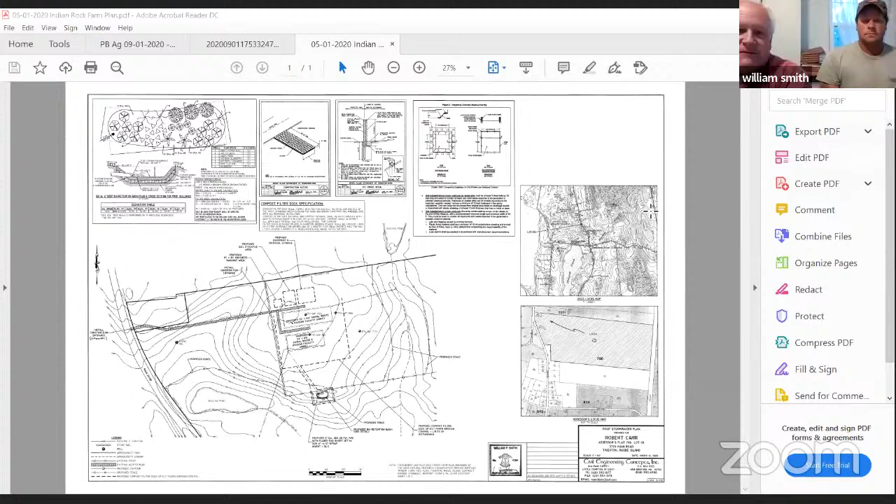I appreciate you making the best of this situation we're all in. This environmental review statement was before the planning board earlier in the year, where there were some deficiencies. Mr. Carr came to us, and we went ahead and tried to pull together some of the missing pieces.

It's 720 Main Road in South Tiverton. We're trying to install two barns. We've extensively dealt with the NRCS in terms of proper animal management. He's got cows on there, hopes to be able to milk the cows once he's got appropriate facilities. What we're asking for tonight is permission to install two barns on the property.

Did we lose him? His audio froze, or his visual froze. Is he still there? Can you hear me? Yeah, I can hear you. Your feed is unstable. There we go. Your audio is kind of in and out, but we'll bear with it. Is that any better? Yes, so far. All right, sorry about that.

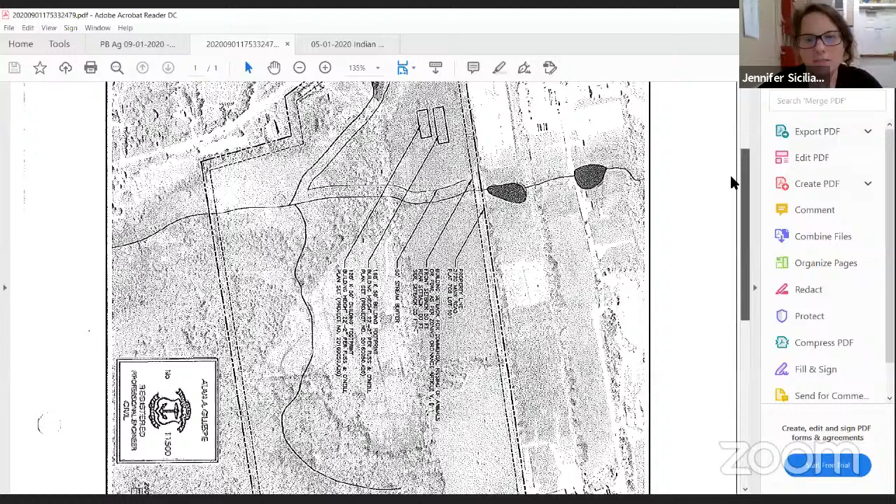So there are several pastures throughout the site. And what's being done now is that there will be fencing around those areas to contain the cattle so that they do not get into the streams or the wetlands. Again, that's something that the NRCS is mandating that Mr. Carr do on the farm.

So it's hard to tell on that picture, but there are several pastures throughout the property, and the pastures are all alternatingly grazed. I'm not sure if that's the appropriate term, but the cattle are moved around as appropriate, and they will be fenced so that they can't stray into the stream or into the pond.

Okay, if we look at the old one, that's what I was looking for. On the plan you show, you have the sheltered areas clearly fenced in, and on the east side of the stream that's fenced, and to the north of the pond, but it doesn't show any other fencing to protect the rest. Yeah, east and west of the stream will be fenced in — we didn't show the whole farm. We were really looking at this more in terms of the construction of the barns themselves.

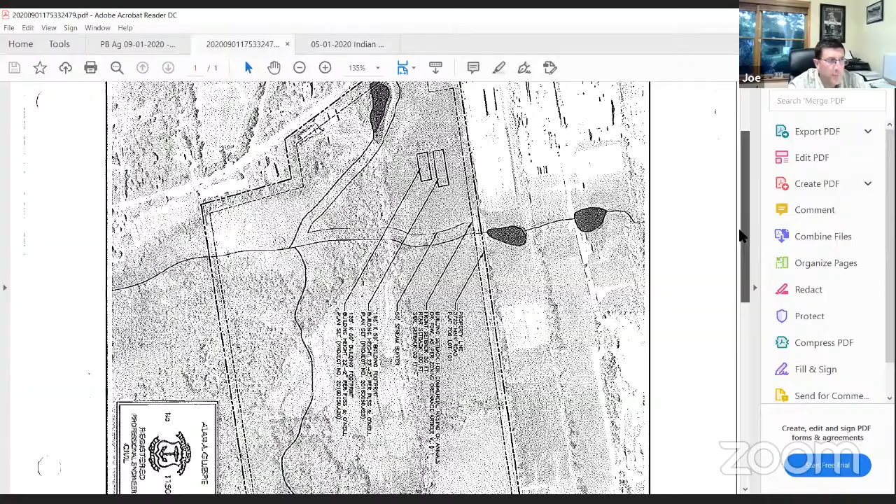Okay. Susan, it's Joe — yeah, oh yes. Quick question, Bill — did NRCS provide a minimum distance that the fence should be from the pond? If so, they should probably just show that.

Yeah, it was 30 feet, but we've made it 50. So if you could just add to the plan a 50-foot minimum — I mean, 30 is required and you're proposing a 50-foot minimum. Sure, we can show that.

Okay, and I just had a question about the three other dotted line structures — are those all temporary during construction? Yes. Part of the soil erosion and sedimentation control plan requires that we have a concrete washout area, a soil stockpile area, and those designated areas so that the contractor, which will actually be much of the work done by Mr. Carr, stays in designated areas.

Okay. So Joe, do you feel comfortable — or not comfortable, but is it acceptable — with their stormwater plan? I guess the biggest thing is whether it all calculates or engineers out adequately from the structures. Yeah, that's all pretty much cookbook, right out of the manual. Okay, all right, excellent.

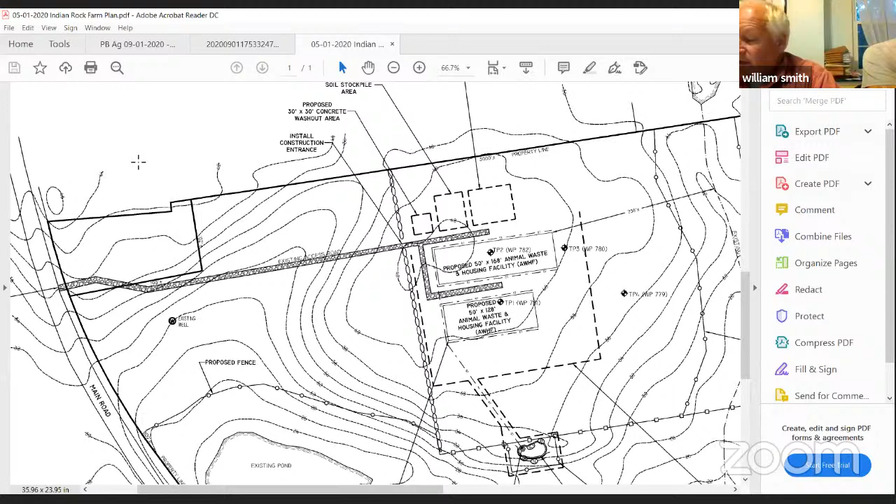Okay, I have a couple last questions. Joe, do you need any kind of stormwater management plan for this, or was one submitted for review, or is everything adequate without one? You're talking about operations and maintenance. Yeah. Again, as Bill said originally, it's fairly simplistic. It's gone through NRCS as well as agricultural, and I think the increased impervious area has been addressed by the rain garden. So I don't know that you need anything else.

And then the last question I had was, who does the SWPPP reports on this? Who's going to be designated to do those? I'm mostly concerned because it's so close to the watershed and wetlands, so I didn't know if Bill, you were planning to do those. I was planning on doing that. Construction period should be relatively short, so if the board doesn't mind, I could take that on myself and copy the board each week when we do the inspections. If you're going to do them, please submit them to Jennifer so we have them for the file, so we know they're getting done.

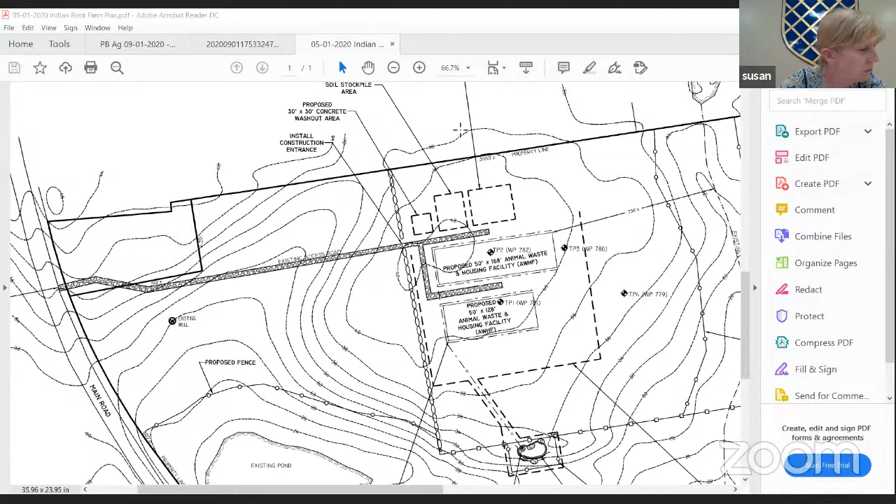Again, we appreciate all the information you provided us, and what we will do is take a vote to send a positive letter of recommendation to the building official so you can move forward with this project. So do I have a motion to endorse this environmental review statement? I'll make that motion. And do I have a second? Second.

Any comments or questions? Okay, so we have to do a voice vote, roll call vote. So we'll go through that. We've got a first and a second to endorse this project.

Okay, so we have Rosemary, yes. Susan, yes. Dave, yes. Peter, yes. And Christine, yes. Excellent. Okay, you have five yeses. Thank you very much, and no nos.

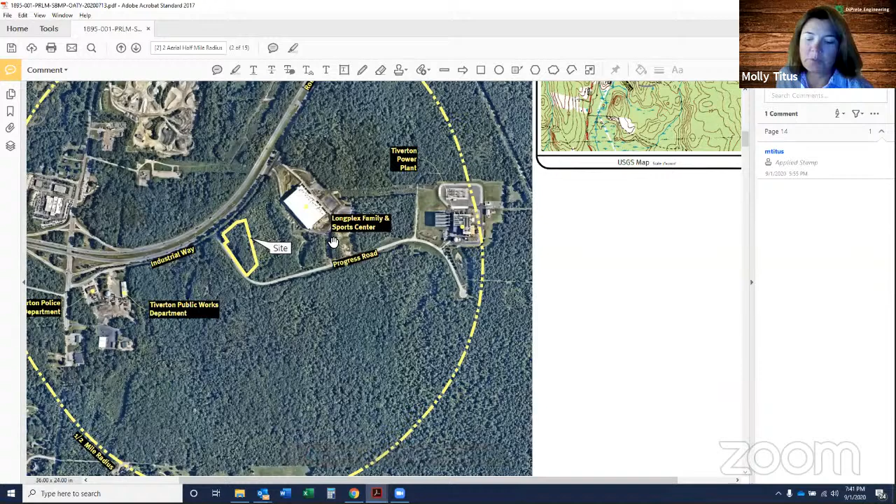Again, as Dave mentioned, we're at Assessor's Plat 107, Lot 801. It's on the southwest corner of Industrial Way and Progress Road, located within the Tiverton Industrial Park. The existing site, as shown here as an aerial view, is wooded, as is the majority of the existing industrial park. The property is owned by Southern Rhode Island Properties and is proposed for development by Advantage Self-Storage.

So here's the proposed site plan. This layout is exactly the same as it was at the time of master plan. The building footprint, access drives, parking, and approximate locations of underground infiltration and detention for stormwater have remained the same.

This building meets the dimensional requirements for front and rear yard setbacks. It meets building height. It was noted during the staff report that we inaccurately reported building lot coverage instead of lot coverage. So this 19.5% is building lot coverage, and total lot coverage, including all impervious, is 41.8%, which is still far below the allowable 70% lot coverage.

We are proposing 9 parking spaces. Based on a warehouse storage use, there's 1 space required. We are providing 9 for up to a maximum of 3 employees and users of the building to have parking for these front storage units.

We've got 3 full access driveways. All of these driveways are 2-way access. We've got a fenced perimeter for the rear of the building. You can see these 2 gates, one located at the rear and one at the side of the building. These access points will be accessible for emergency vehicles and all users of the building.

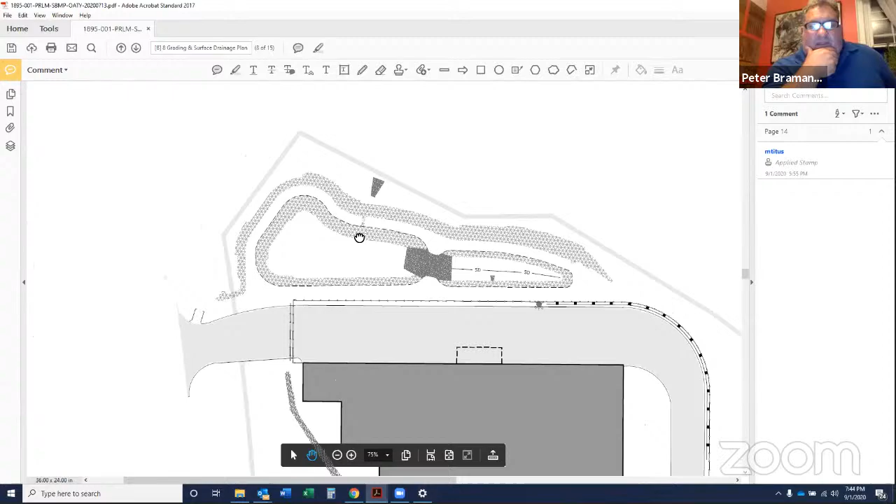Molly, could I just request, I think you're at about 50% magnification. Could you bring it up a little bit? I can try. Let me see if I have a mic option here. Well, I'm not talking about the volume. I'm talking about the image. If you bring your cursor down, see if it, yeah. If you could bring, that's better. Thank you so much. You got it.

So infiltration, water quality, and then detention in the rear of the site. The next image we have is the actual drainage pipes creating all these systems.

Additionally on this plan are the utilities. So this site is serviced by an existing water main on Progress Road. You've got a domestic service and a fire service proposed. These have been reviewed by the water department and are acceptable. Fire flow tests were done, not by us, but by the department, confirming adequate pressure for these connections.

There is a proposed sewer service. The industrial park sewer was designed at the time that the industrial park was designed decades back and never constructed in Progress Road. This project is going to construct the first 2 manholes for the town along in the right of way and then leave an additional stub for future connections. As noted in the comments, this sewer line will need additional permits from Tiverton Wastewater.

In talks with Tiverton Wastewater, which I know you have a letter from Sarah Stearns, their director and engineer, she's not prepared to review the design of this line and connection until the project has passed preliminary plan and building review, because she doesn't want to review it more than once. Not that she won't review it, but she wants to make sure the project is unchanging before they go through and detail the engineering review of a sewer line.

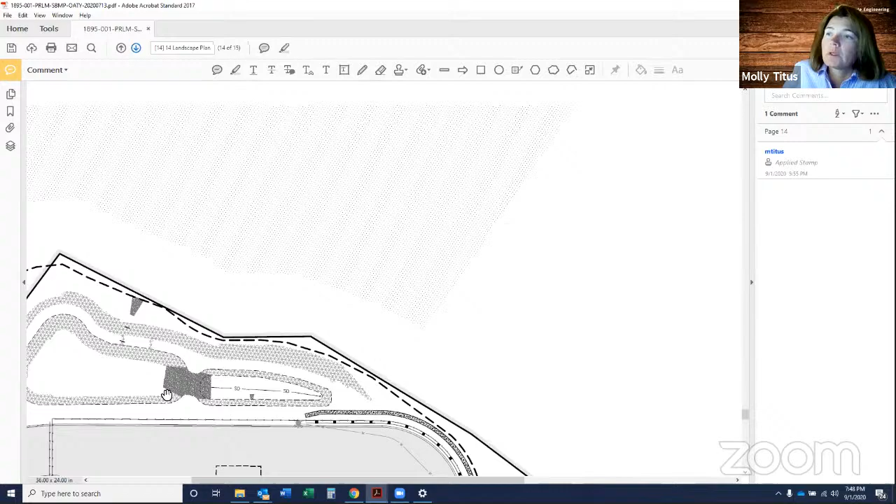So the landscaping plan, I know there's comments, and this is the area up for discussion tonight, but I'll speak about the rest, which is we've provided the 15-foot landscape buffer along the front. We've proposed hollies and birch and maple, screening the front of the building. We have full buffering around propane tanks, transformers, some plants to the rear, adjacent to the detention pond, and then also along this retaining wall.

This area is the area for proposed selective clearing, as mentioned on the architectural plan, and will be part of the view shed review. It's acknowledged that we've provided some buffering here, but perhaps some additional plantings would be required in this area where we're not clearing native and existing vegetation to provide that 15-foot buffer.

In summary of the site, that's kind of the overview, the details, what we have for permits and approvals at this time. I don't know if we want to do engineering questions now, or if you want to go on to the building with Mr. McPhee.

Susan, that's kind of... I know. I think it would help. I'll ask the board what their general sense is. I think it would be easier if we focus on some of this stuff first before we go into all the design elements. That would be easier for me. How do the rest of the board members feel, unless you want to hear the rest of the presentation first before we go back to the beginning and start going through this in sections. Anybody have a preference?

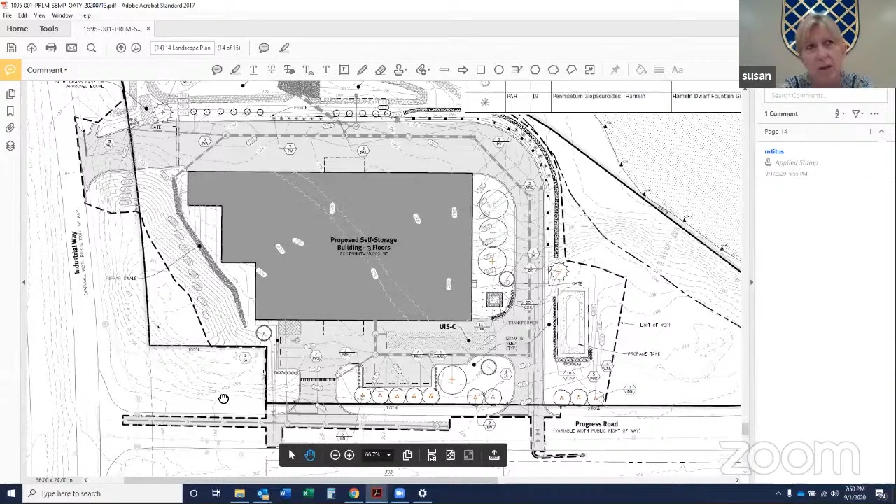Going once, going twice? I like divvying them up, talk design later and look at the land use plan now. That's great. Okay. All right. Anybody else want to voice an opinion? Okay. All right. Why don't we start and go through the sections of what you guys have presented now.

I'm trying to figure out how we can not go back over things again. So I want to start with, I guess, Joe. If you can cover your comments in relation to the grading, the drainage, the stormwater, things that are on the plans first, and all your comments, so we can get through all that part.

Thank you. Molly, I think you did a good job with the presentation. We'll start there. I just had a couple of notes that I wrote down. I think you said you have permits. You have a PAP permit from RIDOT for the state road? No, we don't have a state road. We have local DPW. Oh, Industrial Way is not state?

No. No. Okay. Let's do all the utilities as a separate section, Joe. All right. Okay. All right. We'll do all that later.

Going to the drainage, you noted the roof drain goes into the subsurface storage in the front of the building. For clarification for the board, that's actually a very good place and use for it. Roof runoff does not require pre-treatment, whereas runoff from the road does. Molly's told us that everything from the road and parking lot goes into the sand filter, which is pre-treatment, offering pre-treatment and infiltration. So I think that was done well.

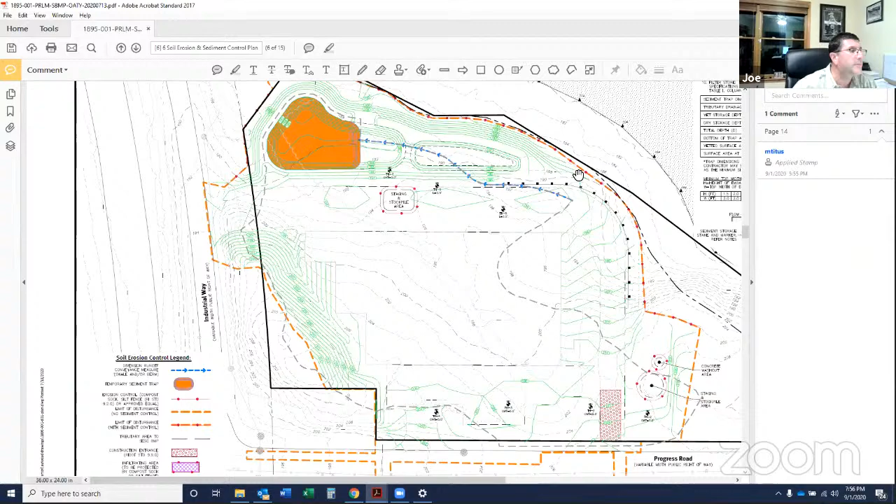Provide call out on detail plans for what appears to be a wall constructed along the driveway in the northeast corner of the project. So where's that wall? It's here. Okay, how tall is that wall?

Is that wall going to require structural calculations? That wall will be Versalock, which will end up getting a structural stamp at construction.

That's fine, just when they do the Versalock, coordination - just remember you do show guardrail. And the straps, if they go far enough back, you're driving guardrail through the straps. It can be done. The minimum distance is 5 feet from face of wall to face of guardrail, and we have 7 feet to allow room to install that. Okay.

Like I said, I know you can actually install the posts through the fabric. It just needs to be noted, so when they're building it.

Provide an elevation view or a section of the retaining wall for the planning board. Again, just a quick elevation, I'm thinking for the reviewers, what type of wall is it? You said it's a Versalock wall, so can you tell us, or equal, Versalock, Unilock, or...

Yeah, well, it's like saying Xerox machine. Can you explain for us non-engineers what that means? A Versalock - it's a modular block wall.

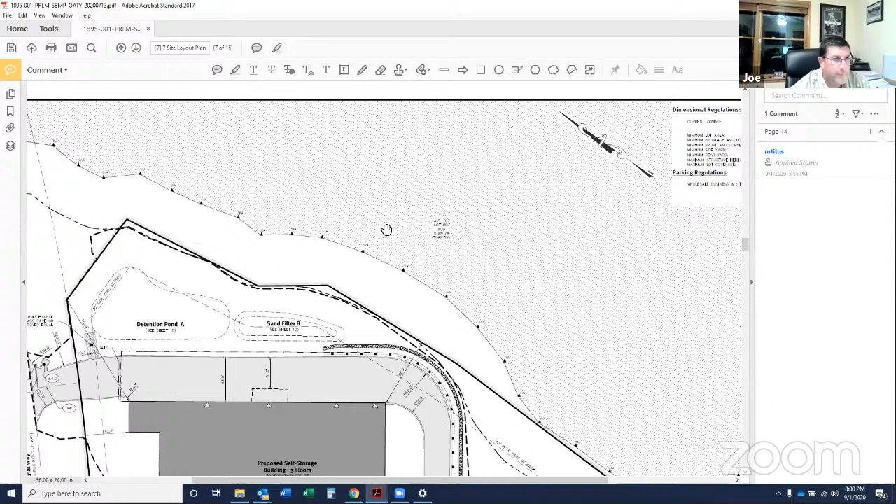The last couple of items - please provide call out for driveway and parking area material on the plan, not just in detail. I imagine it's a paved parking lot. Yes. It's not pervious pavement. No. Thank you.

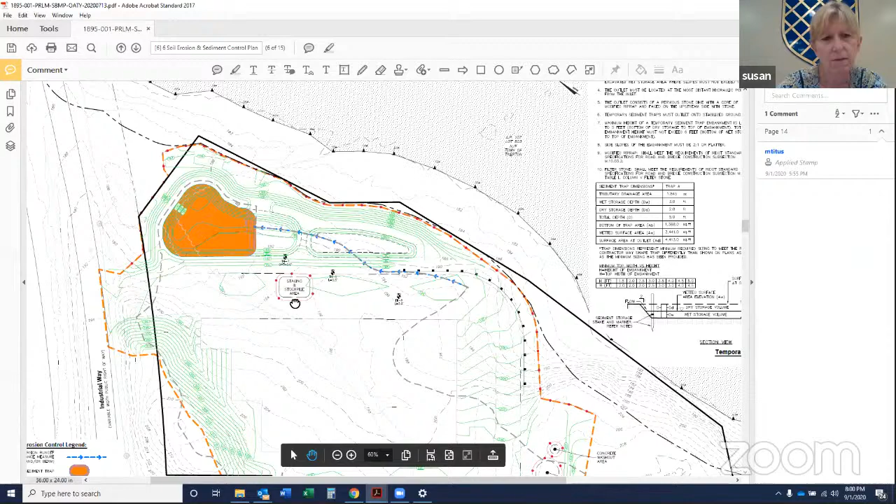Green lines on one of the sheets. Oh, that's the soil erosion plan. Same contours, they're just shown lighter. Yeah, but the front shows a lot of elevation, and the back shows a lot of elevation change, so I can't get very 3D on it.

You can explain a little better for us what it is now and what it's going to be after, the before and after. Molly, you want to field that? Sure. So right now the high point is right here at the corner of Industrial and Progress.

It basically entirely slopes towards the wetland edge. So if you picture this, elevation is up at 214, you've got a high along here. There's a high point at the other end of the site. Everything pitches back towards the wetland. So at elevation 214, back at this wetland edge, it's 184, the existing grade. So it slopes to the back.

Right now, this roadway is at 202. We're proposing our finished floor at 205, just a little higher than the road, which is how you like to see buildings so they don't look like they're in a hole. And then the back of the building is an additional story lower. So the building is kind of built into this site.

So you've got a building that looks about level from the road. You've got 206 here, 205.5. So the building will be at eye level, doors at grade coming from the road. And then this ramps down to provide an additional story in the back, to make this constructible without more earthwork than is needed to fit this site.

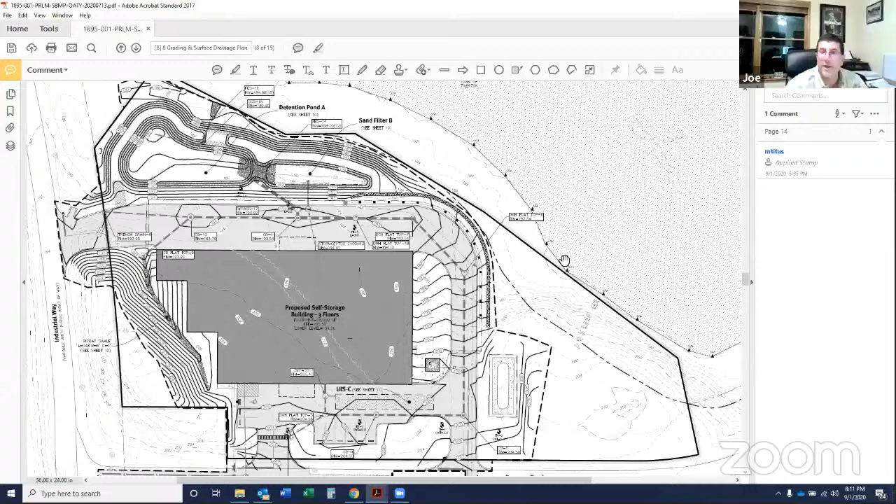Anybody else, any other questions? Okay, Susan, yep, you should have a copy of it. I've got a copy of the stormwater management plan dated 2/19/20. I imagine I have three of those binder things at home. I don't have them with me because I don't tend to read them, honestly, because they're beyond me. So I leave that to you guys, to legal and engineers, to read those and interpret them for us. And if they pass the test with you and you give us your recommendation, then I think that's where we go with it, because I don't have any expertise to evaluate the information in them. So, but I think you did submit three: a soil erosion, probably stormwater, I can't remember, something else. So I think we're good with that.

Okay, so let's move on. I wanted to go through all the utility items that were presented, the municipal utilities and things. I think we could go with that next.

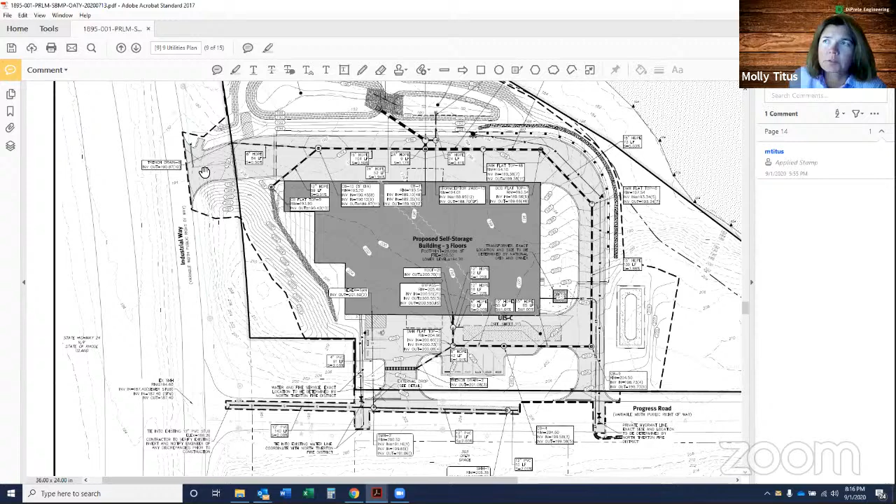We don't have the authority, because that's not part of your property that actually fronts on Industrial Way - it's town property. This is part of the road right of way for Industrial Way. So it's the same here - we have frontage on Progress and Industrial.

Right, so Rick, can you explain - that's why I want Rick to explain to me what it means that that's right of way for Industrial Way. I guess I want to know who owns that property. To my knowledge, DPW maintains it, but the town owns Industrial Way all the way to the circular cul-de-sac, where what I would call the northern entrance to Longplex is located.

So what does that mean, because it's not actual road but it's right of way? Travis, I don't know if you need to explain this - are they crossing onto property that belongs to the town that they need permission from the council for, or is this considered actually part of the road? So their property borders onto road. I mean, it doesn't border onto the road, but it borders onto the right of way.

Susan, I think counsel should weigh in, but right of way or town road are pretty much one and the same. Any town road is within the town's right of way. So it's a public, town-accepted road. Well, wait a minute - it's incipiently dedicated, correct?

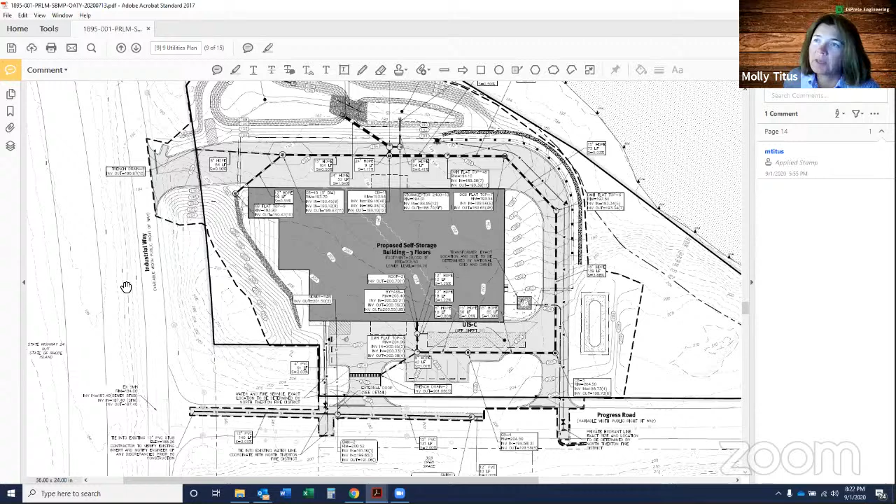That's my question, I guess, because the road isn't there. The road is there—the right of way starts from here and goes over to here. This is considered all actual road. The paved area does not define the road; the two lines Molly just pointed to define the road. Our dark property line starts the road, and then this ends the road. So it's an easement, and I believe when we got this from the state, it was more than 40 feet, if recollection serves me, but again, this was way back in the day.

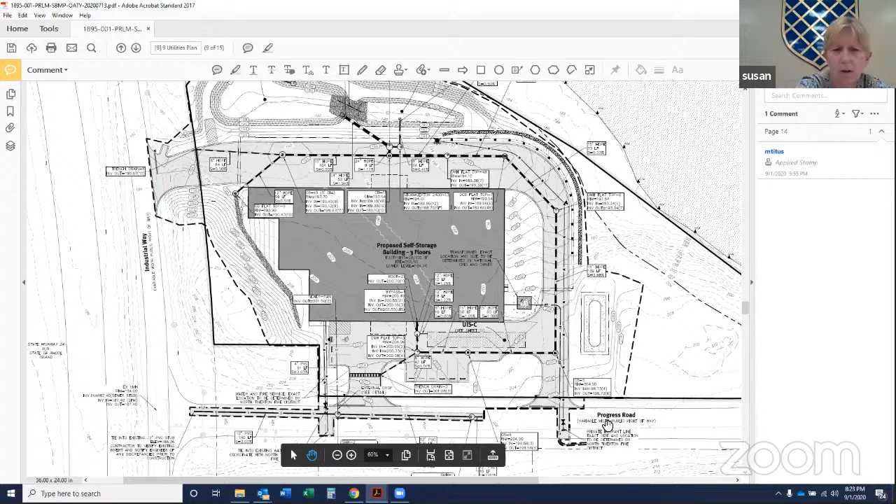So is that considered road, not town property? I mean, it's town property, but it's road. Is that true for the part that swings around onto Progress Road too—is that going to be considered right of way also? This right of way, this is the Progress Road right of way from this line, but then this left corner—I believe the corner at one point in time the town was going to hold onto so they could put some kind of signage, way back. So does that fall into right of way, or is that considered town property as a different lot? That's why the boundary is there, I think—I think it's a parcel, is it not, Molly?

I actually think the right of way flares out if you look at the mapping right now. I know there were parcels—I could think that's how it's labeled on your plans. I just am not clear about it, hold on, let's go to the survey. Yeah, there you go. So no, I agree with Molly, that corner is actually part of the road.

Where it reads Progress Road, the road is 50 feet or so wide. When it gets to the intersection, it is actually much wider, so that way if the town does decide to put up signage or radiuses or whatever they want to do, that's all considered right of way of the road. But right of way and road are usually different—a road is placed within a right of way.

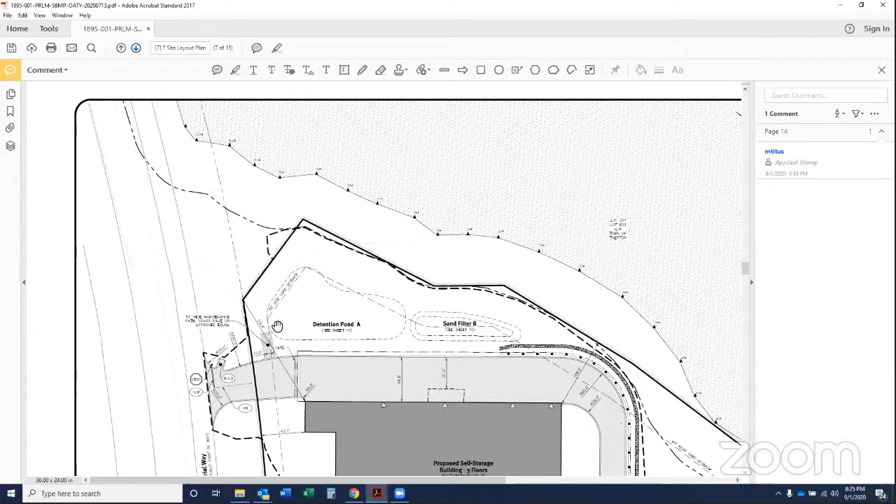Industrial Way is a particularly wider right of way in that case, but anybody who gets a curb cut, they cut across the grass to go from their property line to the actual asphalt pavement or a sidewalk. So this is a common occurrence where DPW gives a curb cut from the actual pavement to their property line, and it might be across sidewalk or grass.

Okay, all right, that helps. Thank you. Does anybody else have any other questions or comments about DPW? Okay, I'm all set for my comments. Thank you, Sue. Okay, thanks, Rick.

All right, I'm going to go on to North Tiverton Fire District, and that is the water that supplies the business park. So they're saying that they do have availability for water, for adequate pressure for 3 people—I guess that was 15, yeah, 15 times 3 gallons, so 3 times 15 gallons a day.

My question with that was, I know it doesn't fall under our purview—I assume this is going to have sprinklers inside for fire suppression. Yes. Okay, so I don't know if the fire department could, or who calculates how much water volume and pressure that takes, in addition to just supplying water for flushing of toilets and a sink.

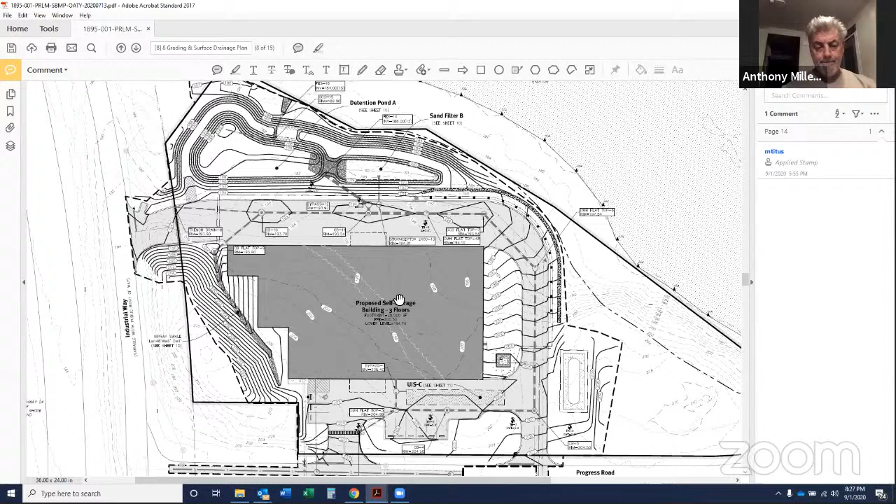Engineer. Yeah, the fire protection engineer. There's a fire protection engineer who does those calculations based on the available pressure in the street. He will size the pipes to provide the coverage required, and part of that calculation is tied all to the building permit.

But if there isn't sufficient pressure in the street, the applicant would have to put in a pumping station within the building or on the property that would provide the pressure required for those sprinklers. But again, that's all tied into the fire department and building inspectors' review of the plans and their permits.

Okay, so just so it's clear, any additional engineering that it took to make it work would fall on the applicant to provide, not the town—is that true? Correct, if they want a building permit. Right, it's up to them to make sure there's adequate volume, water, and pressure for their toilets and their sprinkler system. Okay, all right, does anybody have any other questions about water availability?

Okay, all right, then we have the Tiverton Fire Department letter. It was the placement of the 30,000 gallon propane tank, saying that they have adequate distance from the building.

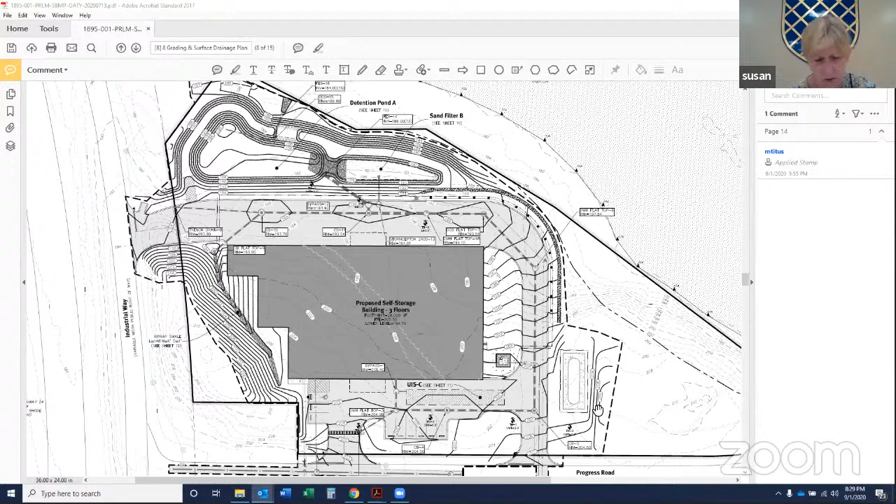I'd asked that you show fencing, but they wanted to see some kind of bollards or security on the plans. Also, I don't know if you have any detail. My question was, is that propane going to be piped into the building? Because I didn't see a line to heat the building. So how does it get there? Am I not seeing the line that shows how it gets from the tank to the building? No, there's not a pipe drawn at this time, but it will run here.

Can you put a pipe in? Yes. All right, usually for the fire department we'd like to see it, and we're required on other plans to show more detail in your notes about the propane tank - the elevation, if it's on a concrete pad, what the fencing around it looks like, if you're going to have any safety bollards, all the things the fire department was specifying, like the detail in the plans and how it gets into the building, extensively in the codes required to permit a tank of that size and nature.

There's a whole list of requirements that we'll have to abide by. So are you saying that would be at the building official's level? That's a separate permit actually that gets applied for typically by the tank provider and installer. It was done well after the fact on the neighboring project.

Okay, so I guess I need to ask somebody, Joe or somebody, if you feel like this is adequate representation for a preliminary plan, or do you want to see any more detail of this? No, I think it meets what's required for site plan.

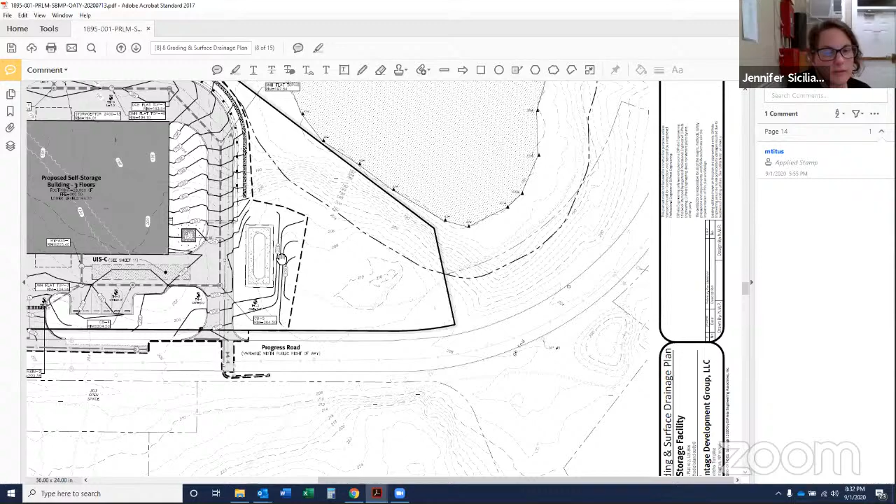But I would like to see the line. You have all the other utilities drawn showing how they get to the building. I'd like to see where that propane line's going to be on the plan - not complicated, just where it runs. I believe the landscape plan has a fence at least. Yeah, there's fencing shown - that's this line. The dotted line is the concrete pad. Right, the oval is the tank. It's a freestanding tank at this point, so the line goes into the building.

Okay, does anybody else have any other questions about it? Okay, then we'll go on to the DEM insignificant alteration permit letter, shown from the RIPDES permit and the wetlands preliminary determination. My question is, it says site plans were submitted with the application for DEM on March 10th, 2020, but the plans you submitted to us are dated July. If you can please submit the copy of the March 10th plans so Steve and Jennifer can review those to make sure they match what we're reviewing. Okay, yep.

Anybody else have any questions or comments? No. Okay. Well, I've asked all my questions on utilities. Does anybody else have any, on this part? Not on this part. Okay.

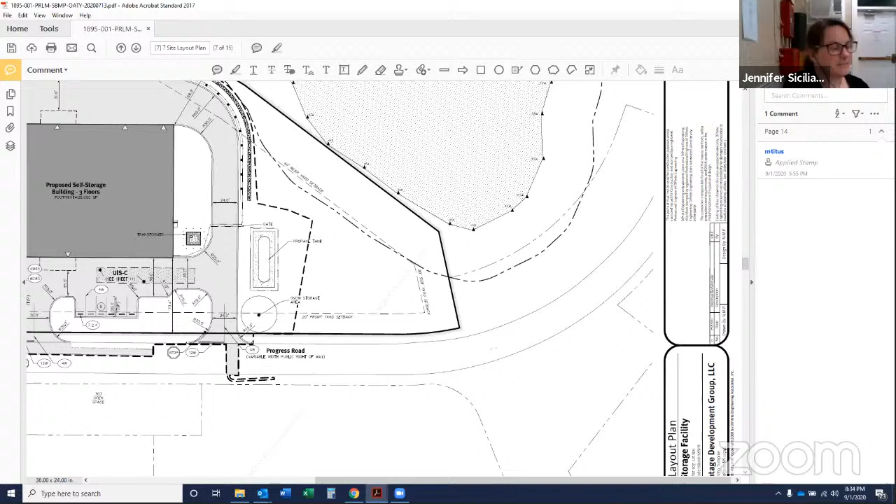I just want to make sure everybody remembers in their packet the minutes from January 21st, 2020 are the conditions that we had for master plan approval. I won't read them to you, but it's page 3 and 4 of 11. So before we review the preliminary plan, we just have to make sure all of these conditions have been met, and they're through most of them now. We just have to finish that up and keep that in mind as we finish the process.

If there's nothing else specific to the land use, then I think we will go ahead and go on with the design architectural review. So whoever wants to come and present that, it's your turn.

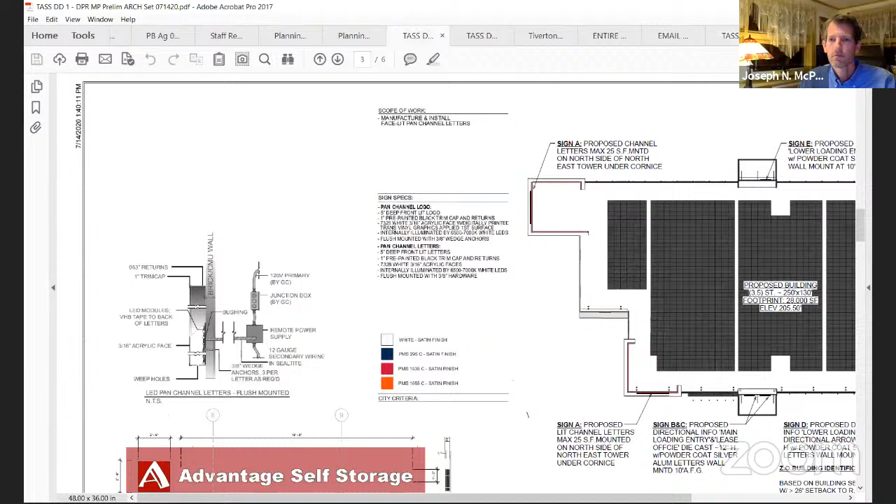I can share my screen now. Sorry, should have done this a little earlier. One second on that. Excuse me, one second. So this is the architectural set that we submitted. Let me turn this off. Okay, sorry about that.

So this is the exterior of the building. On the lower level, on the north side, there are some grayish, taupe colored panels. Those are horizontal, and there are vertical panels too, and the tan is more vertical.

On the northeast corner and on the northwest corner, there are two towers. These towers may occasionally be visible from the highway. They have some display windows on them showing a storage unit display, kind of a display of the storage unit doors. This arrangement of the towers and display windows is part of the prototype being developed for this company. There's another building in Port Jefferson that has very similar towers with these display windows.

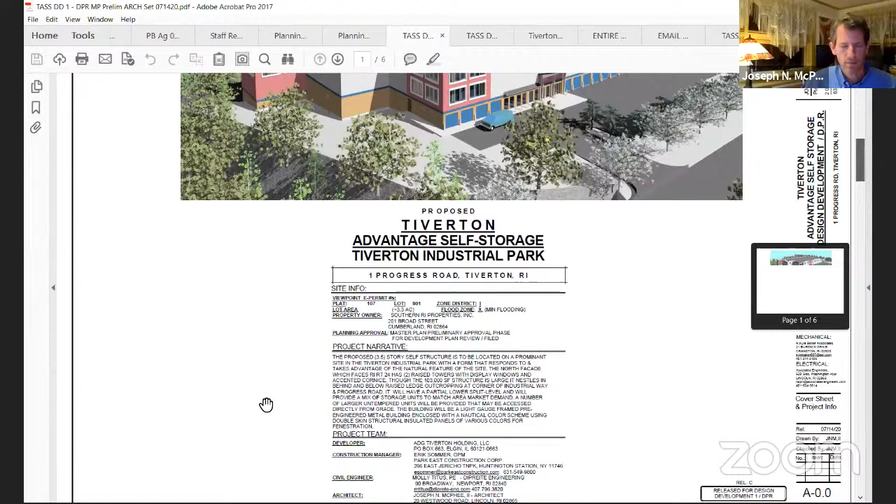There are also, at the lower level, a series of overhead doors that are also untempered, and a second entrance at the lower level that mimics the one on the upper level, very similar.

The overhead doors have a jamb header detail panning that's used, which is a little more durable than the insulated panels. There are bollards protecting the overhead door openings as well. You can see the bollards there.

The double skin insulated panels are one method to improve the efficiency of the building, and the roof is also insulated well, hopefully above code. It's a single pitch shed roof, with a parapet on the south side and parapets on the north side around the towers, and also at the field of the roof.

The water pitches to the west, where it will be collected on interior roof drains, arranged in pairs, with a short parapet on the west side. The water is collected on the interior, and through multiple drops comes down to the galleys under the paving area for the rainwater.

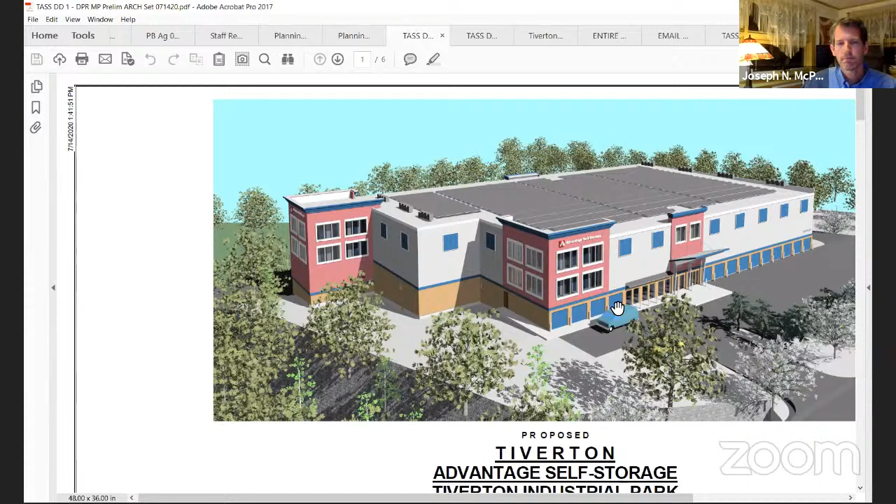The towers are raised a bit from the balance of the roof, but I'll talk a little bit about the concept of the building.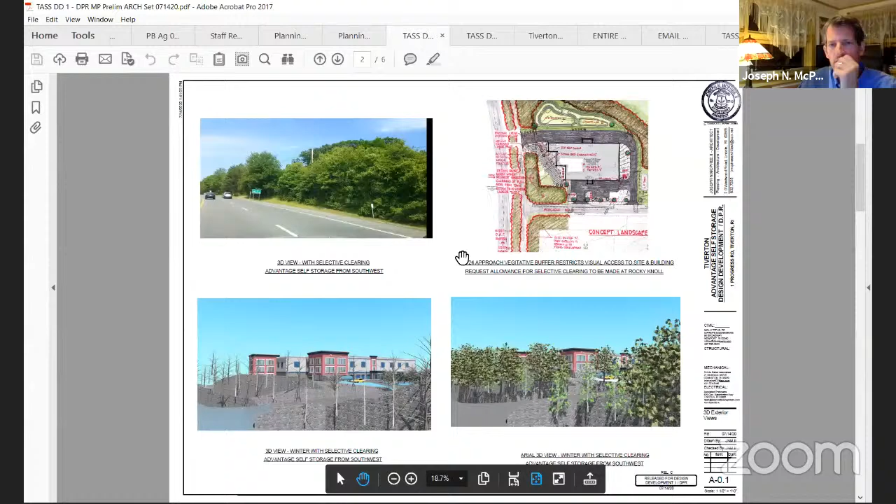With the site, essentially this is the highway. We have buffers between the highway and the industrial road, a vegetative buffer that you can see in this photograph. I'll show other photographs of the tree buffers as well. There's also a secondary buffer with a very wide right of way on Progress Road and Industrial Road that is heavily wooded, with a considerable amount of large boulders on this hill.

Like Molly mentioned, it's probably 18, almost 20 feet between the roadway and the top of the hill, and then the floor slab is dropped another 10 feet from the top of that hill. So this really minimizes the size of the building, with this natural vegetation buffer, but also the ledge, the stony knoll that's a woodland.

We are located on a very prominent site, but it's so heavily wooded there's a chance that no one will ever see the building, or very rarely see it in certain seasons. So there's interest by the owner to potentially do some selective clearing of this right of way, keeping the large trees but removing some of the small dead and dying trees and underbrush to reveal the stone feature there, and allow some visual access to the building. It's still going to be heavily screened by both the state right of way and the existing trees. So that's kind of the concept for that.

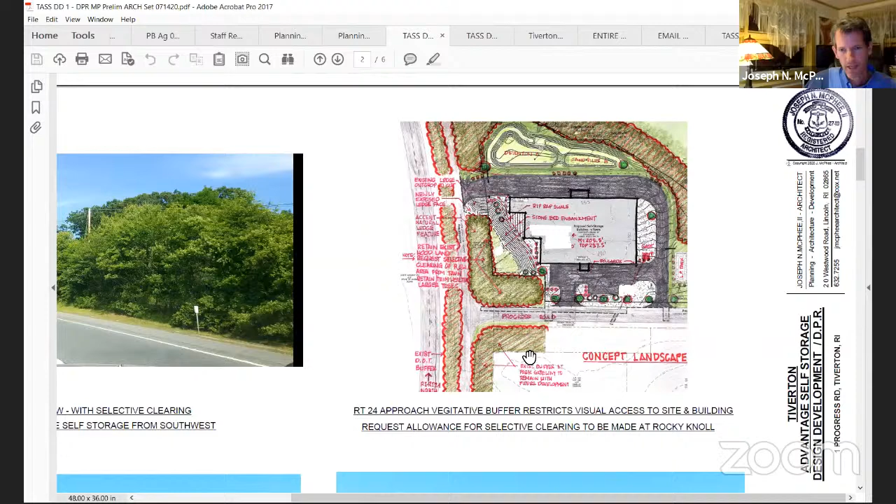I do have some other photographs on the side, I'll show you. These are a couple of renderings that show winter selective clearing; it's going to be a lot more trees than that, probably kind of heavily wooded. I want to share another image here in a second.

So here are some images of the site. This is from Route 24 South. You can see there's a very heavily wooded area on this buffer between the state right of way and Industrial Drive, and beyond. This is another view from 24 looking at the site.

Here's just a couple of other structures in the immediate area of the building. This is the DPW building, the closest building to the site. This is the Longplex structure, which has had extensive clear cutting of the buffer between the highway and the right of way and industrial road, but it's a very large building, set back off the road, probably further than the building we're proposing. This is a much larger building, probably 3 times the size. This is the power plant just up the street from Industrial Road.

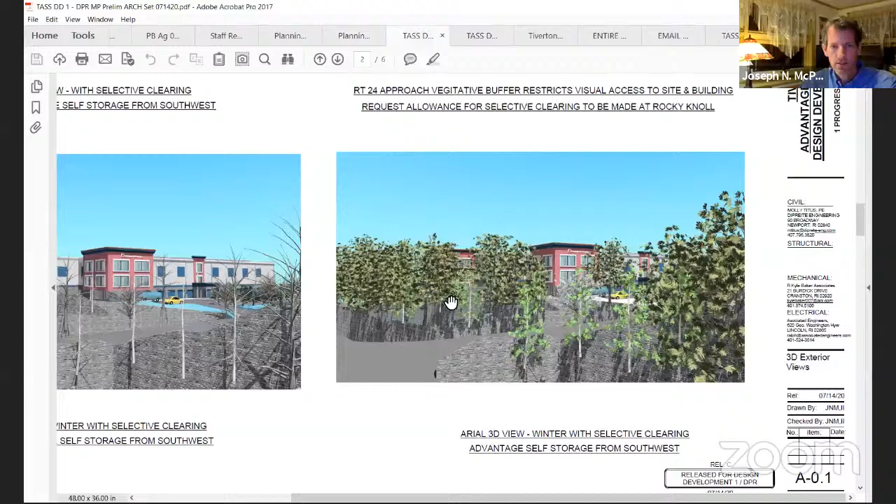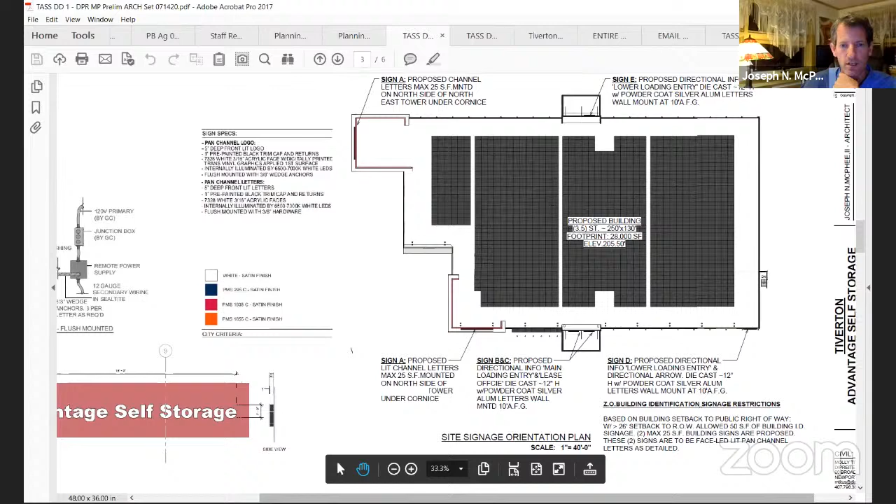I had some discussions with Joe about the zoning ordinance and signage, and that is what is allowed for wall-mounted signs. There is no monument sign proposed for the project. There are some other minor signs that are going to be proposed, just informational signs identifying the main loading area at the upper level and at the lower level.

And then this sign D is at the corner; there's a secondary entrance drive this way, just to identify that there's a lower loading entry this way. This diagram also shows the roof; we have an alternate to provide PV solar panels on the roof.

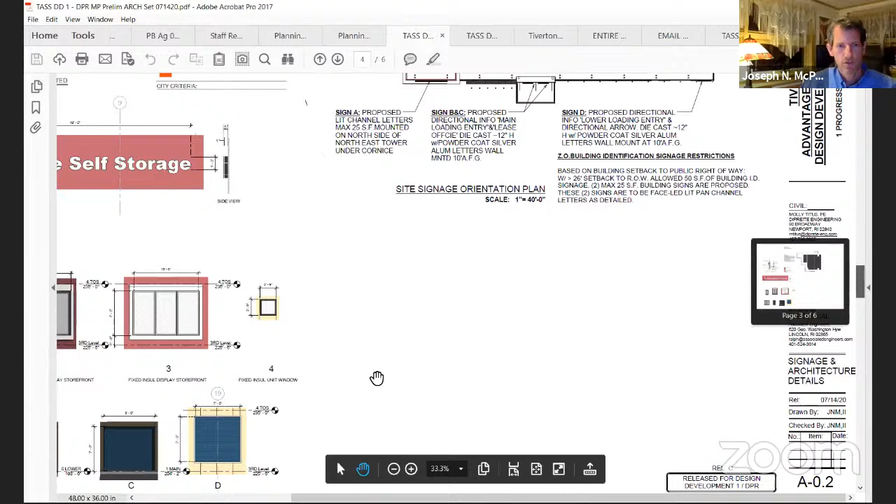So these are just the window types and door types. The entry doors are 3-panel sliding doors. These are windows that are all fixed.

There's overhead doors. All the man doors and entry doors are 7 feet tall. The overhead doors at grade are also 7 feet high by 8 foot wide.

Here's a view of the roof, a little more detail on the roof plan. This is the canopy, 14 feet by 22.6 wide. The roof pitches all to the west, as I discussed. There's walking paths around the perimeter.

The mechanical equipment will be set 10 feet back off the edge of the roof, so there will be no guardrails necessary to protect from falling. It's a TPO roof proposed, which is a white PVC. It's a reflective roof.

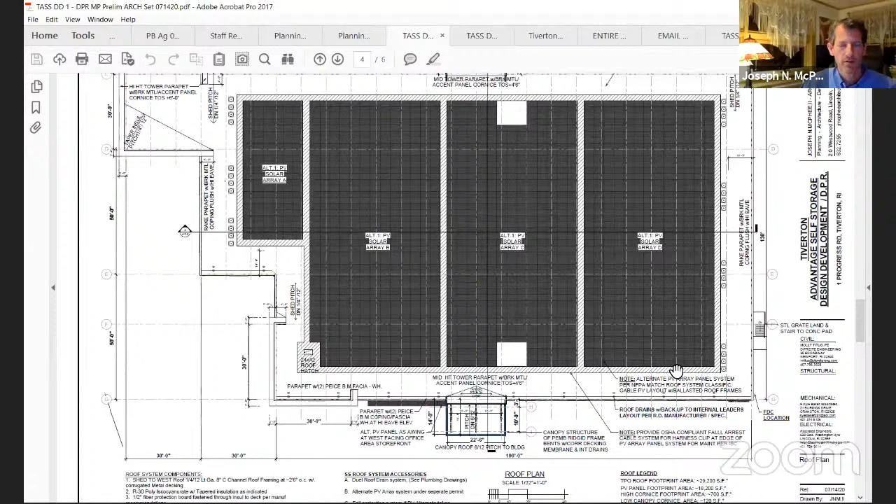There are also vertical panels here and horizontal panels. There's also a kind of blue accent panel. It's a pan, formed pan, kind of a deep relief corrugation, but it's only about 12 or 14 inches tall, and it wraps around the building right above these overhead doors. It provides an accent there.

There are also accent panels that are corrugated metal on the building. They're squares, also 7 feet by 8 feet, the same size as the at-grade loading doors. There's a little more detail on the signage location. There's an elevation there.

Canopies have developed actually since a couple of months since we made this presentation. I can show you what those look like, but there's actually a brick pier being proposed instead of a structural bent. This is kind of a familiar structural member of a pre-engineered metal building, but we've moved to masonry piers, 3 masonry piers, 1, 2, 3.

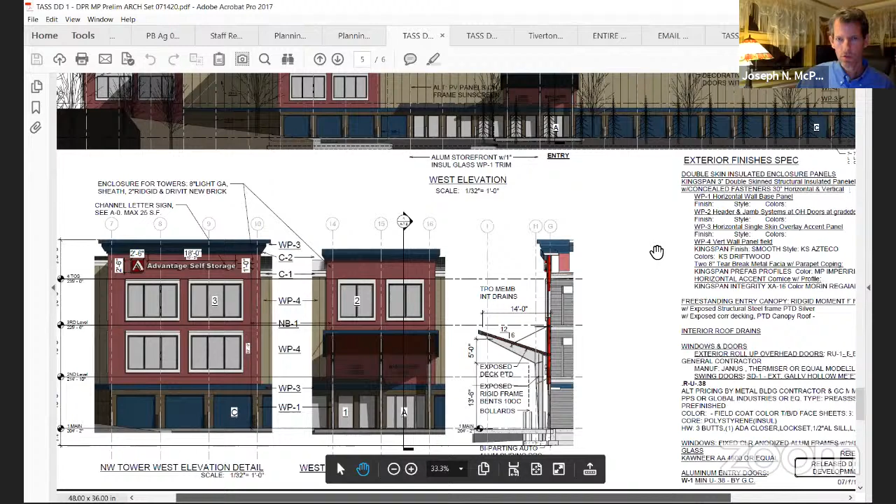So this is the east elevation, which is the 3-story building side. It's, in some ways, intentional to make it not really clear that it's a 3-story building. From the roadway, it's hard to see the lower level directly, so these windows at the upper level just might look like it's a 2-story building instead of a 3-story building.

There is an entrance on this side where there's going to be an electric room, and I think the fire protection room is also going to be there. The FDC is going to be on this corner.

That is about it. So there's going to be a mix of storage units that would meet the market demand, exterior non-temperature-controlled spaces and temperature-controlled spaces on the interior. There's going to be 2 elevators in the building and loading lobbies at each side.

It's fairly straightforward in the interior. The plans vary - they're not identical stacked layout for the storage. That's all I have about that.

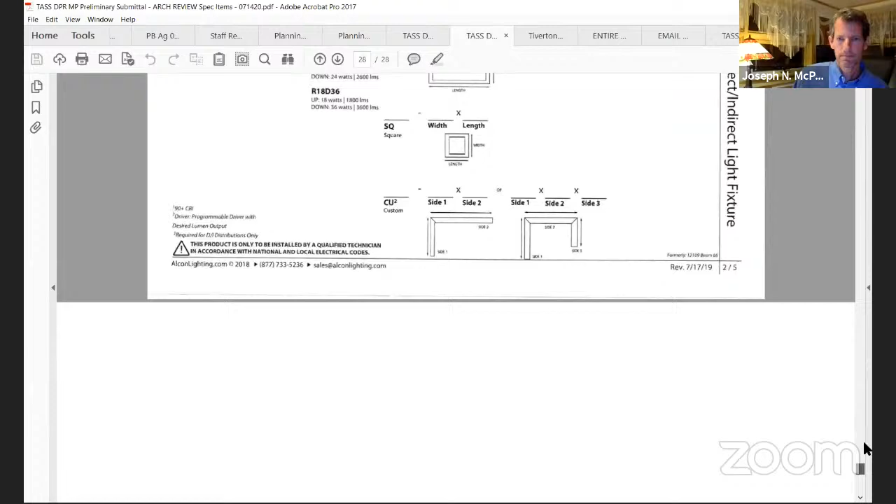So there's lighting for those corridors, they'll be lit with LED strip lights that will illuminate the doors. The doors are going to be a darker blue color at this display, so it's not going to be blaringly white. The sidewall panels of the doors are white.

These are the loading bay doors that you're describing? So loading bay doors are not going to be directly lit.

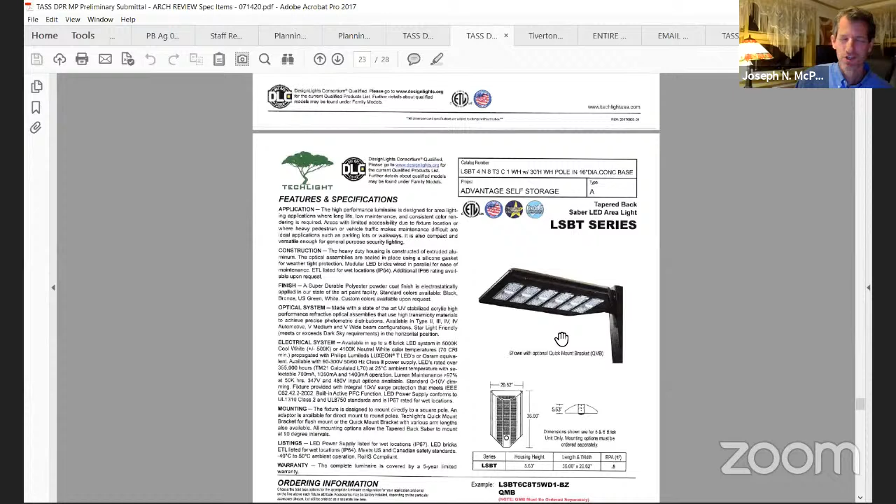There's not going to be - that first fixture I showed you is at these display windows. The display windows on the towers.

So do they project off the building? Nope, they are interior and they light inside. They light towards the interior doors. Let's see, I can describe it better.

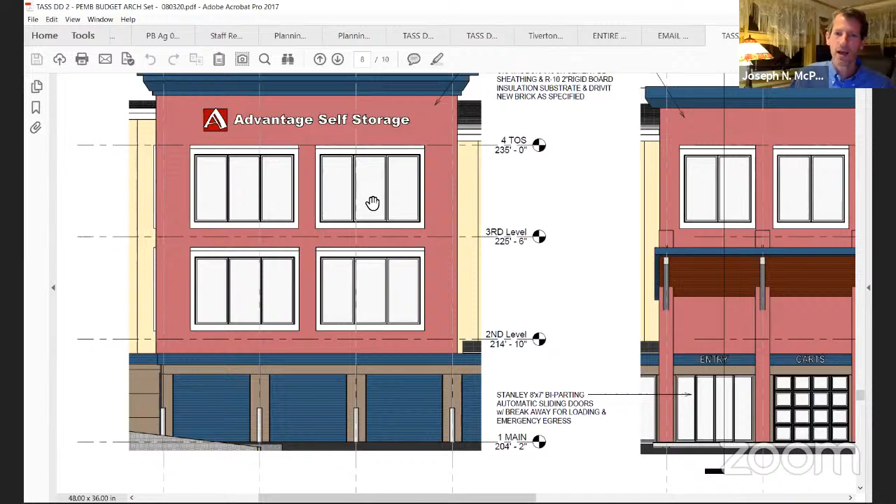Okay, so this is a display window. Behind those windows are overhead doors, unit doors, going to be about 3 feet wide. You'll see probably 2 in this opening and 2 in this opening, and those are going to be blue. On the interior, there will be fluorescent or LED lighting that will light up that wall where the interior overhead doors are. That's kind of symbolic signage - it's not real signage, but it helps people understand what type of building it is.

So these are not actual displays. They're actually transparent windows that you're seeing into the interior, illuminated by those LED lights. The setback from the wall of the door to the window, the distance between those, is about 4 feet. Now that makes sense to me. There's a gap back there.

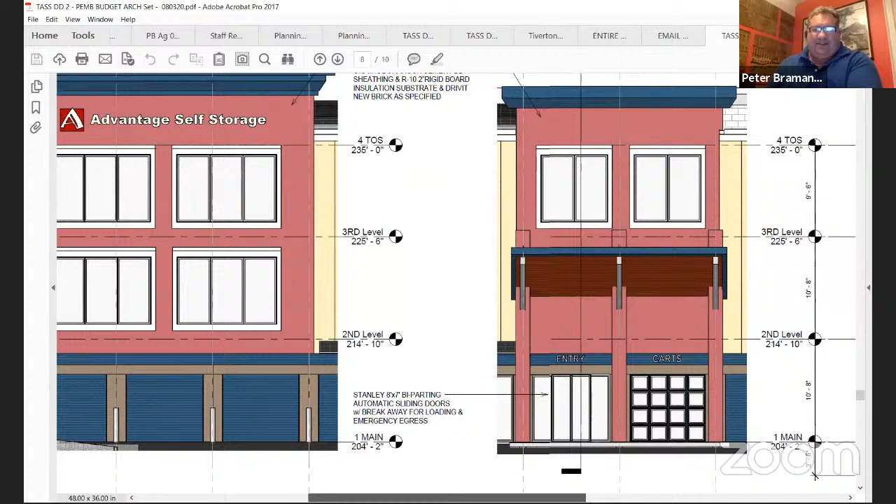Some storage areas have these displays - I'm sure you've seen them before, but they're fake, not actual. None of these are spec for a graphic display. These are all actual transparent windows looking into the interior where there are actual doors. When you said display, that threw me - that's why. It displays the interior on the exterior, but normally buildings aren't illuminated to show off what's going on inside. That is the case here.

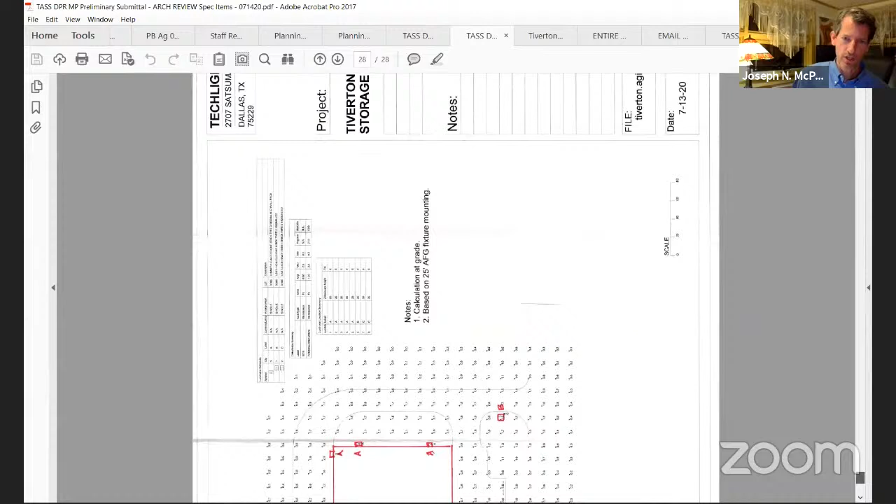What about the exterior lighting? You're going to have dark sky. Yes, so here's the exterior lighting plan. There are really high efficiency LED lighting fixtures mounted on the building that will illuminate the parking and paving areas - those are these B fixtures here.

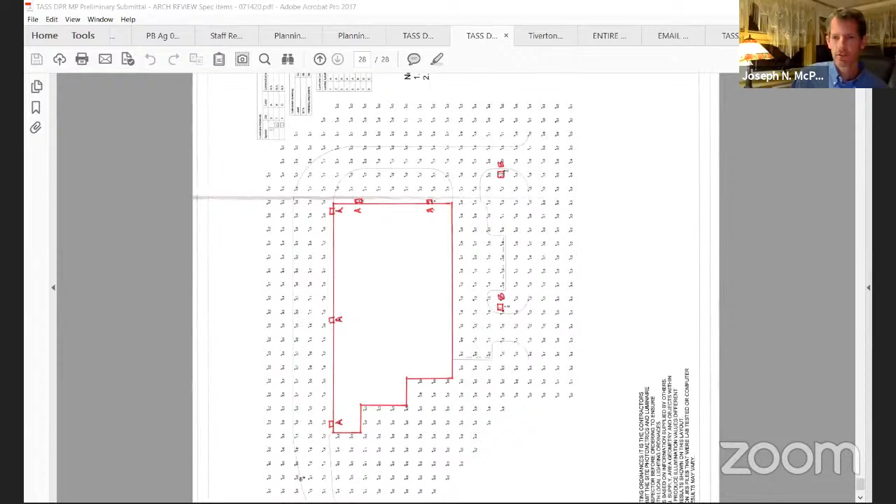On the south side, at the entry drive, there are pole lights labeled as A. There's also one right over here that I didn't highlight, but that's an A fixture. They're also at the curb cut, on the property. And then all 8 of them will be dark sky - yes, they'll have cutoffs, yes, they'll be dark sky fixtures. They are here.

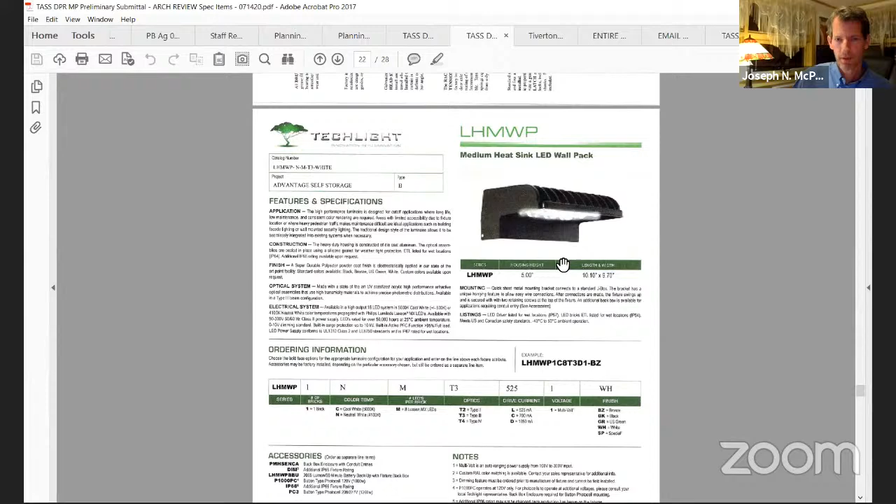Do you have anything that illustrates the actual projection beam of the light, like what is the width at the bottom of the pole versus the top of where it's projected? The material supplier and lighting manufacturers provided the photometric plan, which basically shows what the lighting levels are at different locations. I'll zoom in if you'd like to see more. This gives the lighting levels where it drops off - this is like 2-foot candles, dropping to 1.7, then 1 at the roadway, then a half foot candle at the edge of the road. So that meets the minimum requirements for the throw, but no more.

It's not too way out in the woods - it's very limited. The pole lights are also directional, a single throw fixture throwing light out into the right of way a little bit, and where this is going to be a gate over here.

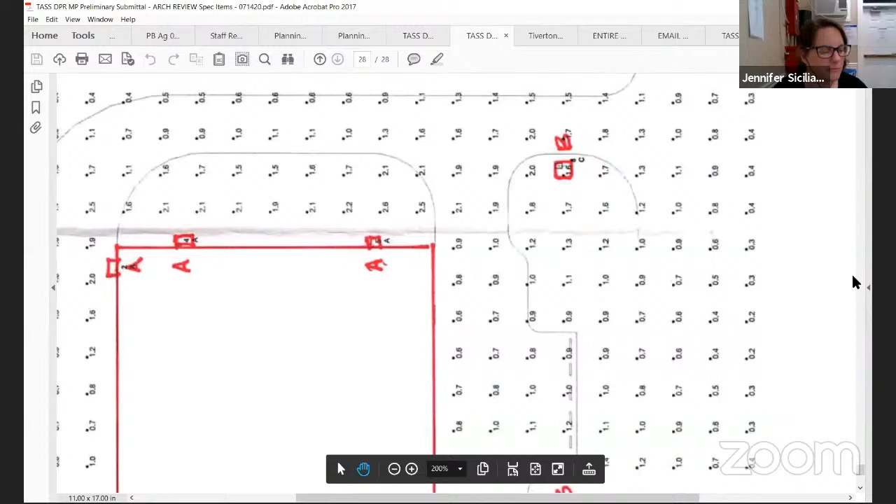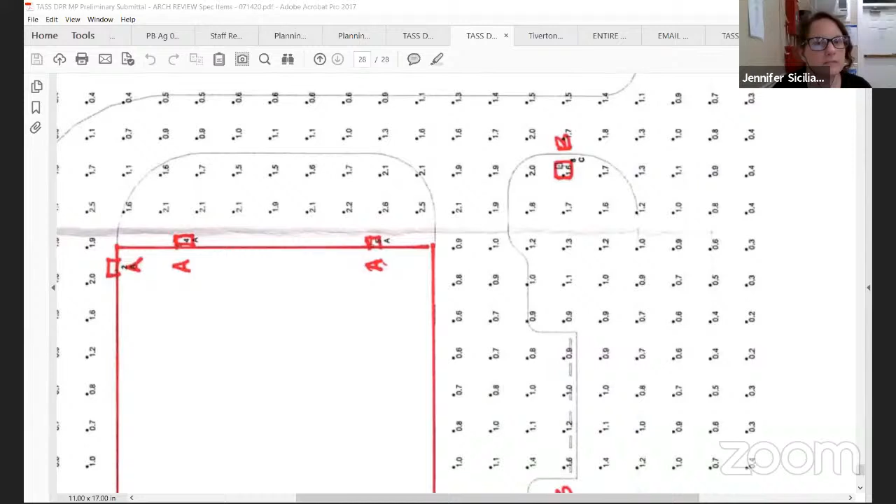So the main sign is backlit, so it's not really dark sky compliant since it's backlit. It's channel letters, so the lights are within the channel and the face of the channel. Usually there's an edge that projects past a lens by an inch or so, but there's a lens and the light fixture is behind that. It also lights the wall - some light comes through the fixture. It's a white acrylic lens, but some light spills behind the fixture, I believe, and lights the wall. So it does not shine up at all.

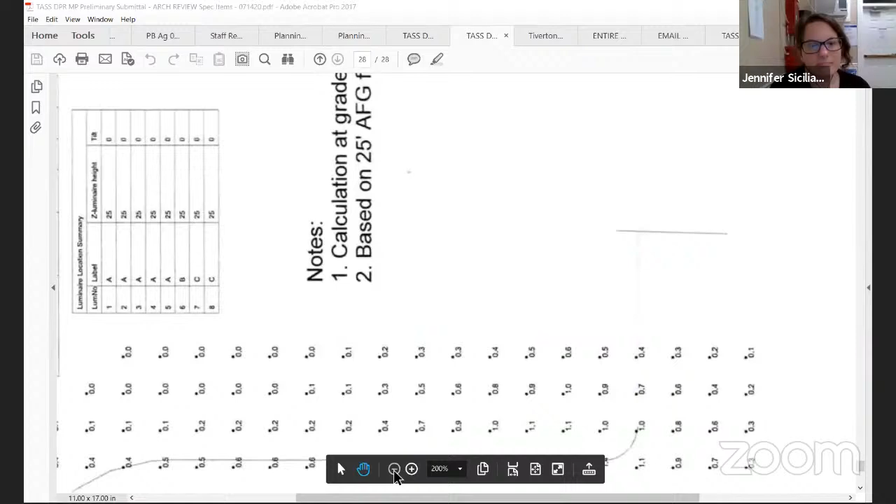There are some fixtures. Do you have any photographs of an existing installation or logo showing how much reflection of that light back against the building there is from the logo and sign? I believe I do, but not at night. If it's possible to get something, that would be great to have. Yeah, I do have some images like this, but let's see.

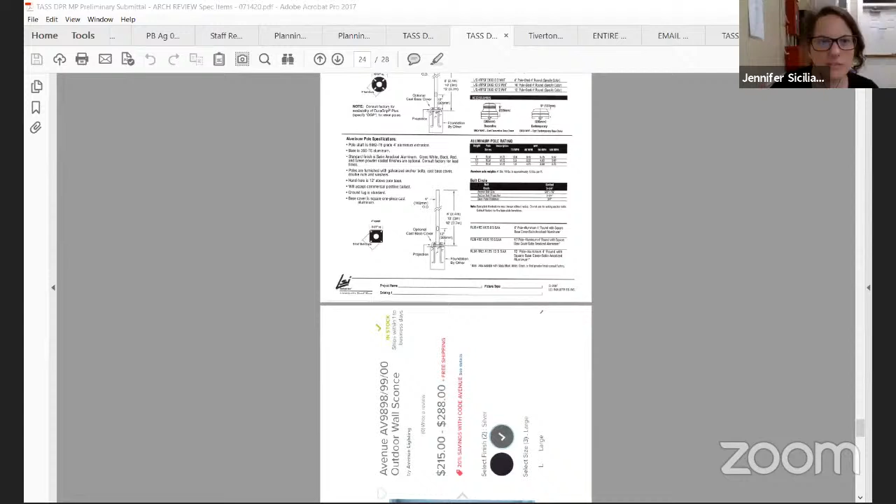Because you're open 24 hours, the lights wouldn't be off at any time. No, the lights are not going off. But it's way back from the road, way back from the highway. It's buffered extremely well, and it doesn't shine up.

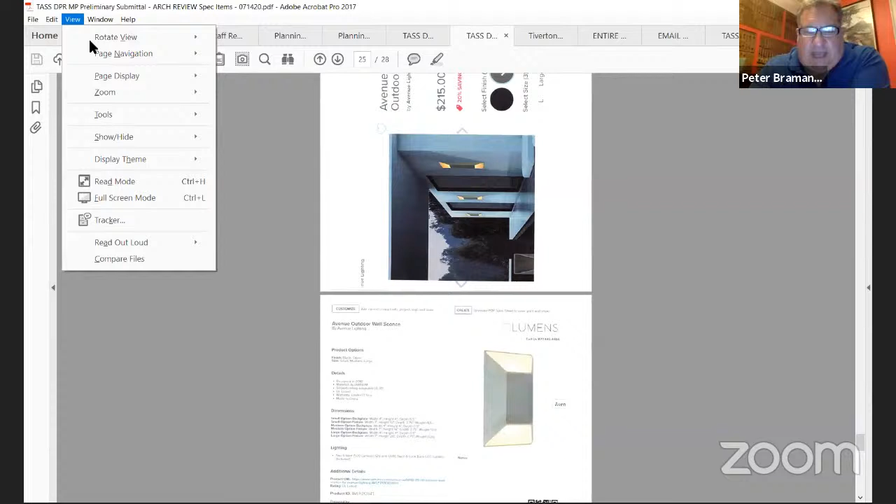These fixtures under the canopy, I do intend to have an up-down fixture, but they will shine up at the canopy, at the roof of the canopy, and then bounce back down. So it's down lighting, but then up onto a canopy. And those are located only under the canopies, not any other part of the building. Yes, correct.

So something like this up-down sort of fixture. I think that covers it with the lighting.

The lobby lighting, can you explain that? Is the main front lobby lighting a similar kind of LED fixture as the office and entrance, or is that a different fixture? There's just up-down lights near the entries, probably on each of the 3 piers. It would be up-down lighting.

The office windows don't have any lighting on the exterior. There'd be recessed troffers. And on the interior of the office? Interior, reflected on the ceiling tile, recessed in the ceiling tile.

And do those remain illuminated 24 hours too? No, I don't think so. The office hours are limited. Most of the interior lighting is by motion sensor anyway, except for at night. Yes. Okay.

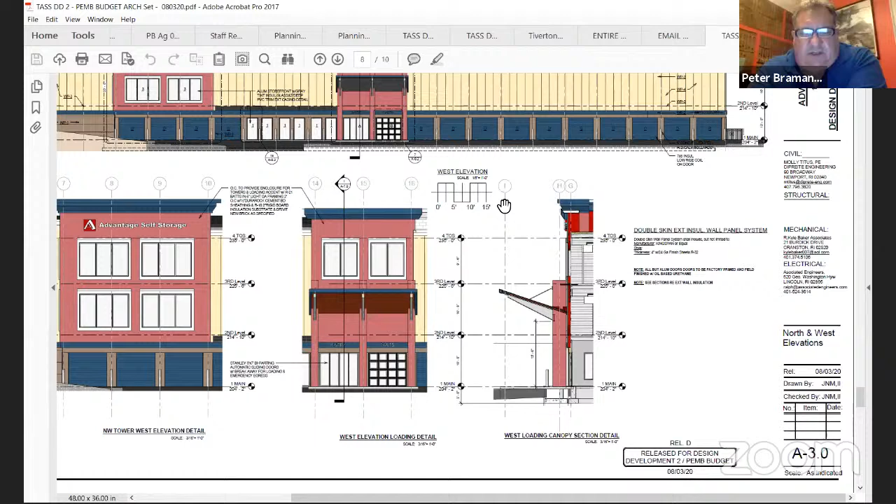Sue, we're going to talk about landscape design later. I don't know, Molly, if building covers that for you now. I wanted to do the initial presentation, and then after we have our questions, maybe the landscape architect can be here the next time, if we have enough questions.

If we have other design questions, do we want to answer those now in the building, or ask those rather now? Well, let her get through if she wants to do the overall landscape, that way we can do the whole picture. Okay.

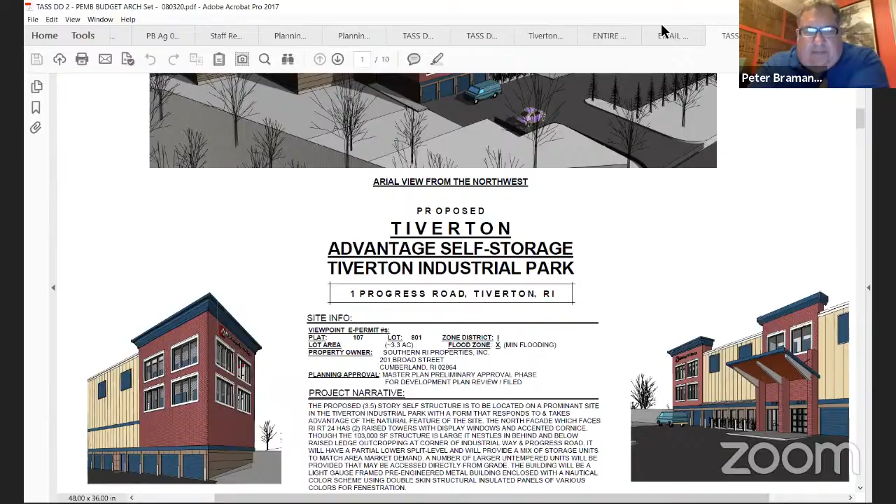With Molly there, we went through it previously, relative to plantings. Is there something specific? I know there's a lot of questions. I don't know what I can offer beyond what's really on the plans in terms of species and spacing. Like I acknowledged, we can add some plantings along industrial where the grading work is within 15 feet of the property line. Okay.

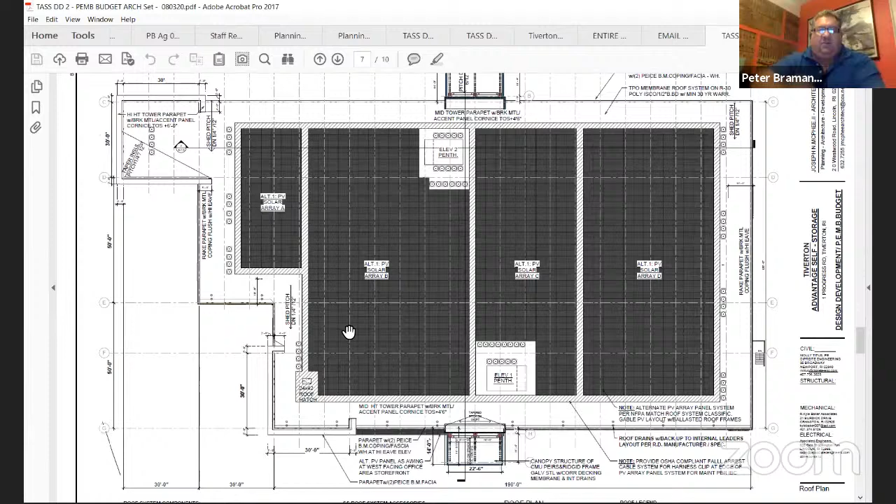But these are all set back off the roof considerably, at least 10 feet. So is there an illustration with an elevation of the roof so you could see - you're saying it's masked by both its setback and the parapets, so those mechanicals aren't visible from the road?

Well, this image is not actually that accurate. Oops, sorry.

So I see those little - you see these on here. Essentially, I set them when I built the model. This line, this dotted line, is actually the slope of the roof. These are all level, but they won't be level - they'll be sitting on the roof.

The parapets are probably 6 or 8 feet high, but they're 10 feet back, and the building is 25 feet high. You're not going to be able to see them except from like a half a mile away. They're not 8 feet high, they're 2 feet high.

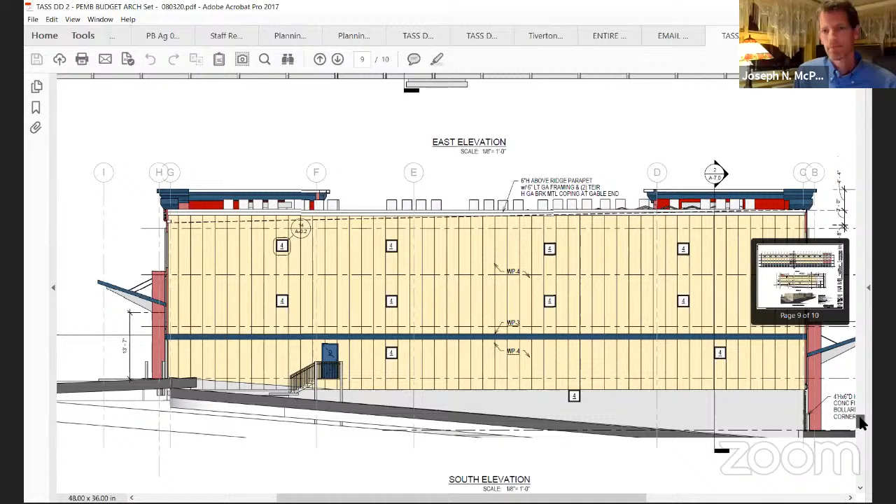So this rendering is not accurate in terms of what you would actually see sightline wise. I don't know the exact size of these heat pump units at this stage of design, but they are small units - 24, maybe 30 inches tall max, and they're set back 10 feet off the edge, and they'll be behind the parapet wall generally.

As well, it's not necessarily a sightline rendering. And yeah, that's what I thought, I just wanted to check. And would there be something that gives us a better indication in further design, a sightline rendering, just so we would actually know.

24 inches above the parapet - that's what you're going to get, but it's going to be back a minimum of 10 feet from the edge, from the roadway. Was it 8 feet at least below the slab? And this building is 30 feet high. Okay.

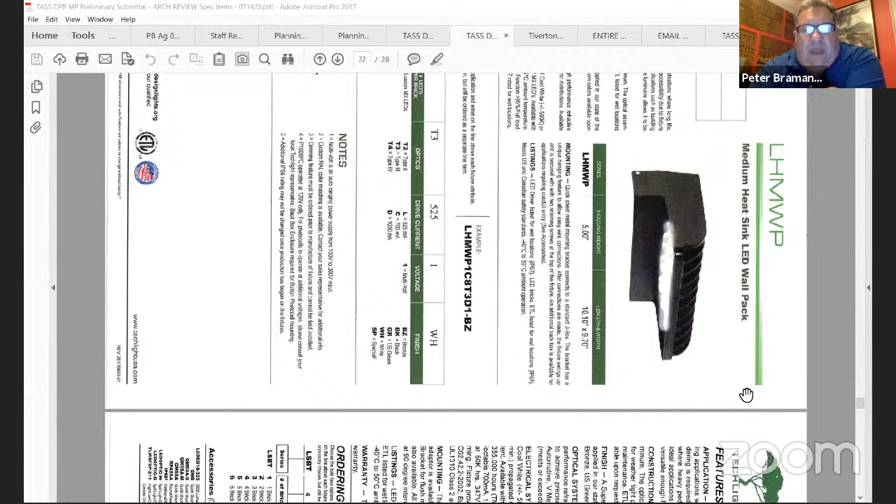Right, right. I think because even your own rendering, Joe, with the winterscape, when the trees don't have their leaves - and you did say there was going to be some selective thinning of this spot - I think that's the concern, to make sure that sightline, as Jennifer was just suggesting, especially in the months without leaves on the trees, we have a really clear understanding of what that's going to look like sightline wise.

Yeah, is your basic concern just the mechanicals? I'd say that's one of the contributing factors. Yeah, I think there's also just the landscaping plan itself, and wanting to make sure the lighting is part of that, and the coloration of the final materials as well. I think all those things contribute in my mind.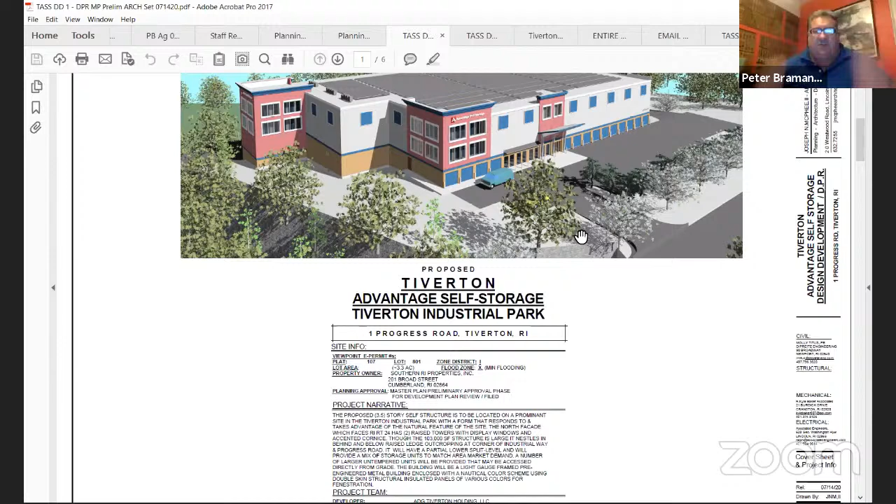I think the more clear we can be about accurate color cues, the best representation we can of the lighting, a sight line view of what the mechanicals on the roof line are going to look like, and a clearer indication when we get to the final landscape plan of what we're actually thinning and what's being planted in its place. While I'm on the landscape part, what the heights of the proposed new specimens are going to be. I don't know if we have a whole list of all the plant materials and specimens, but that would be great to have in terms of the landscape plan when we get there.

With respect to the trees that are planted, they're not a particular height that's called out for in the planning or zoning ordinance. What they do require is a 2-inch caliper for the street trees that are planted. There are a certain number of street trees that may be required, but the balance of the landscape buffer would be more of the shrubbery.

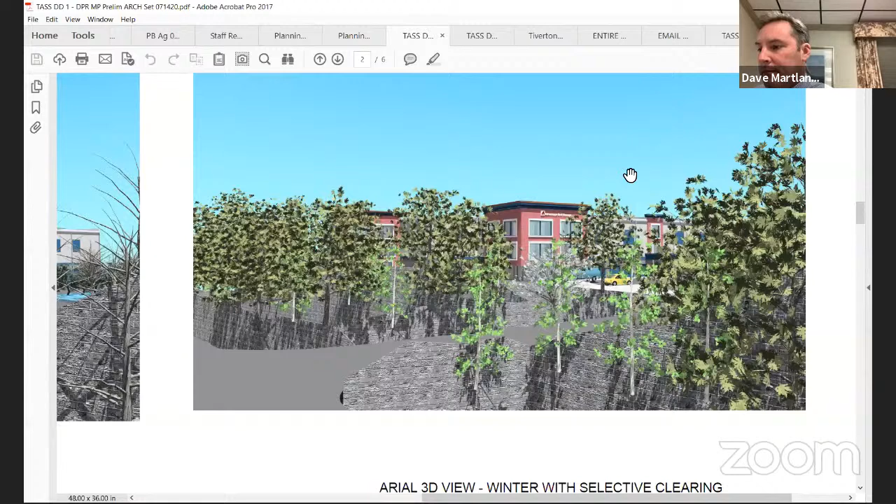Calibrating really how many trees are there, what the caliper is, the trees that are on the knoll area, how big they are, how tall they are, what the caliper is, how much view you're really going to see through that - it's very difficult to portray that to you in any meaningful way that's honest. I can make an artist rendering of what I feel it might look like. This view is from Industrial Drive. From the other side of the buffer, you're really not going to see much, very minimal view. I don't know how else to describe it.

Well, that's my question. Elevation of the back side of the building - how long is the building? What's the length of the building? 300 feet long. 280 feet long, or 250 feet long. That's at the longest.

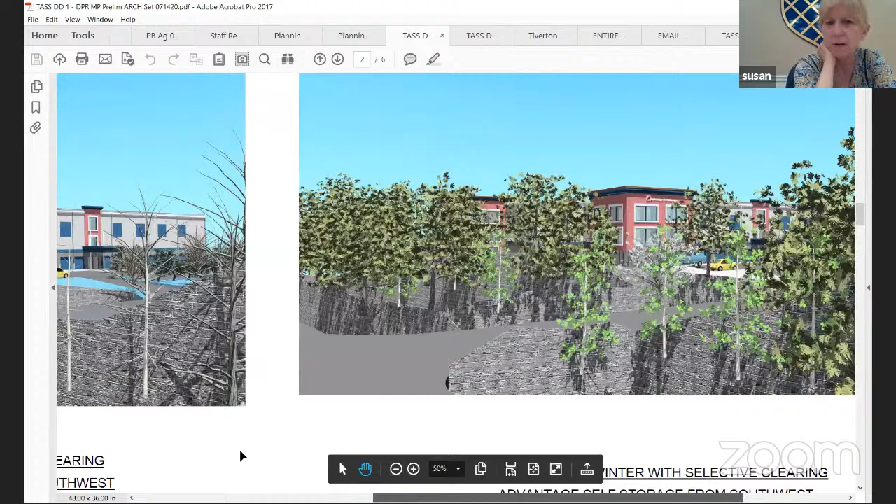I think the part that faces Industrial and Progress Road, you have points, there's areas of interest and focal points, but the whole back side of the building is just going to be one long building. I don't know if there's a way you could create something, because when you're coming from 24 north, driving south, it will be visible - another big long building with not much going on. I mean, I can live with the other side because it faces into nothing, but the back side is a little.

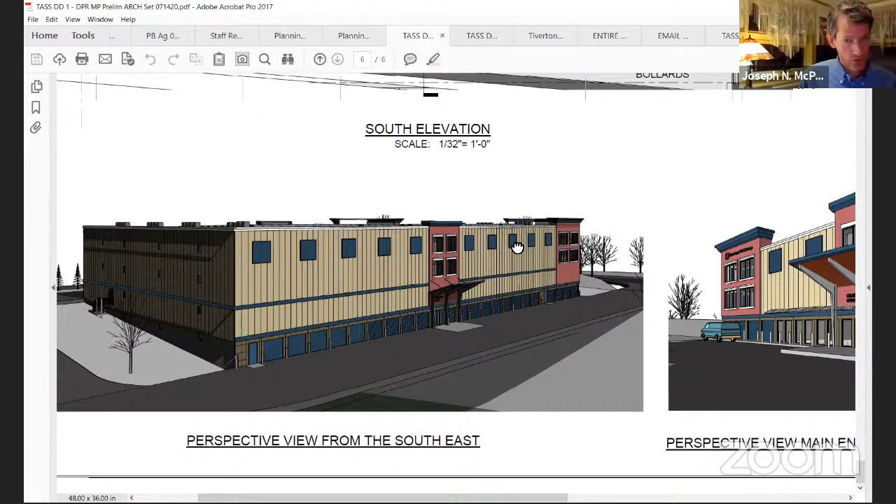So this faces that side. This side, no one will ever see - this side is from the wetland. Maybe there's parcels going to be developed on the other side of the wetland possibly in the future. There's no parcel - once all that's cleared, you have a parking lot, you have the road, and you have all the stormwater until you get to the wetlands. That's going to be bare all through the winter, and that's what you're going to see when you're coming down from 24.

The site plan - so you can see the positioning of the building to 24, please. I don't believe as you're coming southbound, the way the building is positioned, that you're actually going to really see that side. I think the building is kind of turned and squared on our site, not necessarily to the highway, so as you're coming down you're going to be looking at more of the front corner than just the whole side of that building.

Looks more perpendicular to me. I understand how you're going about building this, but when we live in the town and everybody passing through the town, we're the ones that are going to be looking at it for a long time. Yeah, it's not going to be the Taj Mahal, but I was wondering if that backside, if there's anything - I don't know, Christine, if you have any architectural comments to help us soften it, create any kind of - it's not something I can direct what you should put there, it's just comment.

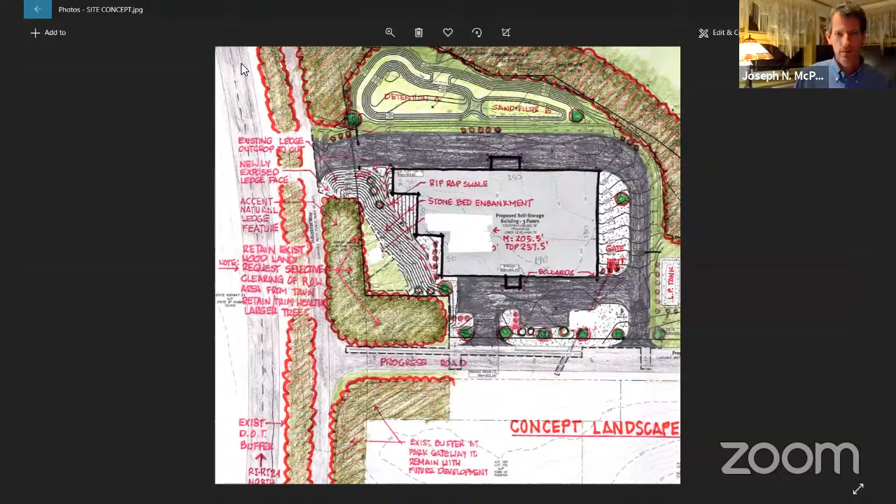The eastern elevation is what I'm looking at. As far as the view, the direction of travel is from north to south. You're on the other side of the highway, but running kind of parallel with the buffer. There's an extensive buffer that's not being removed all along Industrial Drive, because that wetland goes right up to the edge of Industrial Drive, and there's no developable site just to the east. So all the buffer that's there is going to continue to provide some visual buffer to this long length of the building.

We have this tower that projects out slightly from the other face of the building. And then there's this other visual axis here as well, a visual accent at the entry, the loading area. That breaks up this overall elevation. There's a horizontal band here at the canopy, and then another horizontal band here.

So we have an accent door color, a taupe base panel, lintel, and header, then the vertical panels and these accent panels. It is a big building, but there are a few things going on. It's not just a plain vanilla box, which would definitely be objectionable.

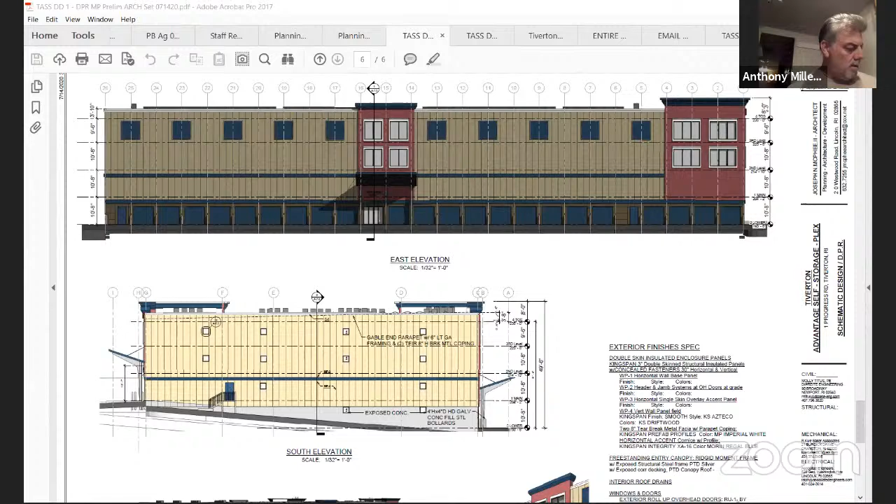What is that actually, how many feet? So this is the high point of the roof. The roof pitches to the west, so you can see this is the eave height right here. On the other side, the wall panels go up a little bit higher, and there's a pretty heavy cornice, a double thick cornice there. The tower on this side is 8 feet higher than the eave height.

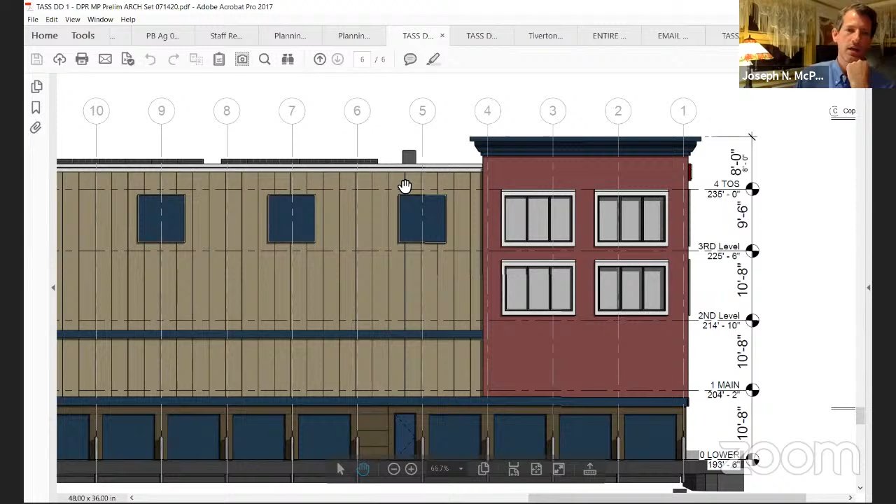I think that's significant, it's almost a whole 8 feet, from the top of the window line though, not the top of the roof line. That's the eave height, top of eave. So the roof is, say, 12 inches higher than the top of steel, right? On the other side it's the same height. You know what I mean? You can't make the towers a different height, doesn't really make sense.

Could you go back to the front side for a second? I had a question about the parking, looking at it the way you had it drawn. I don't know if the doors to the left of the entrance area are ones you can just back into. There's 3 parking spaces, including the handicap space, right in front of those doors, so I didn't know how accessible those doors are going to be, or if you were planning on them to be. Those spaces will need to move down probably 8 or 9 feet towards Progress Road to allow that.

So you're saying the spaces would move down so they wouldn't be right in front of the doors? Correct, they're not going to be right in front of the door, but the parking area needs... I mean, where these 4 blue doors and the 3 parking spaces are, including the ADA parking, I didn't know what the clearance was, or if people were anticipating backing in to unload, because that would impact those parking spaces. There does need to be like an 8 or 9 foot drive area, a loading area, in front of those doors. So those spaces may have to move, like 1 additional space closer to Progress Road.

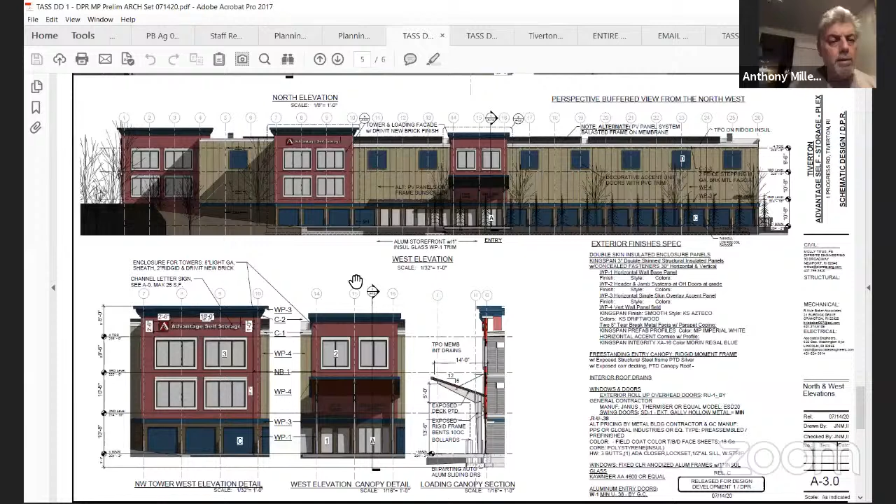Those may be designed as walk-up units. I would have to reference the inside to see the actual size of them, but it's not uncommon for us to design walk-up units in areas that have accessibility. Yeah, I just want to make sure there's enough room for them to get by with whatever it is they're carrying, so between the architect and the engineer, look at that to figure out if that's going to work or if that creates some kind of blocking.

I have observed that as well, Susan, and I understand there's enough space to move those spaces one 9-foot space closer towards Progress without creating any difficulty with grading or anything like that. Okay, however you think you need to work it.

Oh, so I wanted to talk about some of the landscaping. My questions—if you can go back to one of those plans. Landscaping? Yeah. So I'm not sharing right now.

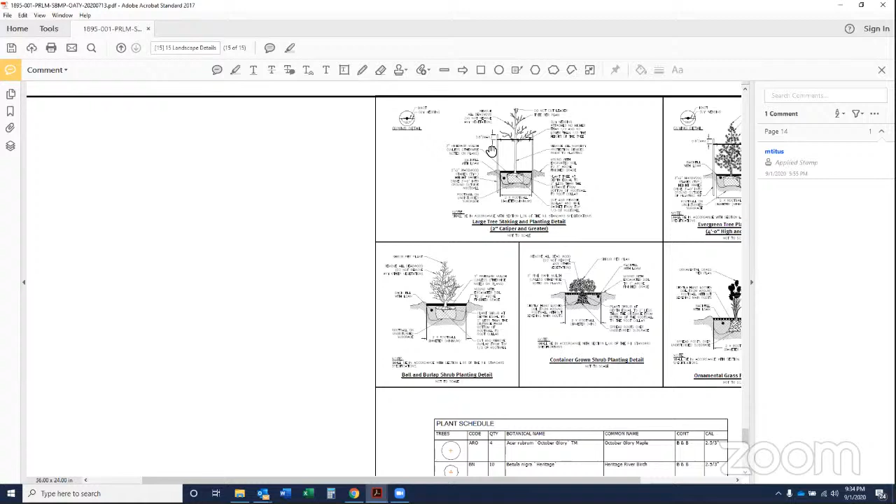There would be limited mulching at the base, and then grass area around it. So that's all going to be—around the 3 trees on the east, that'll be grass, and across all the front between Progress Road and the parking area, in between all that, that'll be grass, other than the required mulching around the base.

And around the propane tank area, is that grassed in? There'd be probably a bed and then grass.

Okay, and then the other question was to the west of the building, where it jogs in and out—between that and where you start having the grading drop, what is that in there? So like here? Yes. Grass. Oh, you're gonna do grass, okay. I mean, initially I thought that was very plain, it needed some shrubbery, but looking at the relief, it looks like it's all going to be covered or hidden by the stone.

So then my other question is just to carry water away from the building, from this existing ledge here, and then in this area where the building steps down in the rear, there's grading slopes as well. But it'll be grass cover.

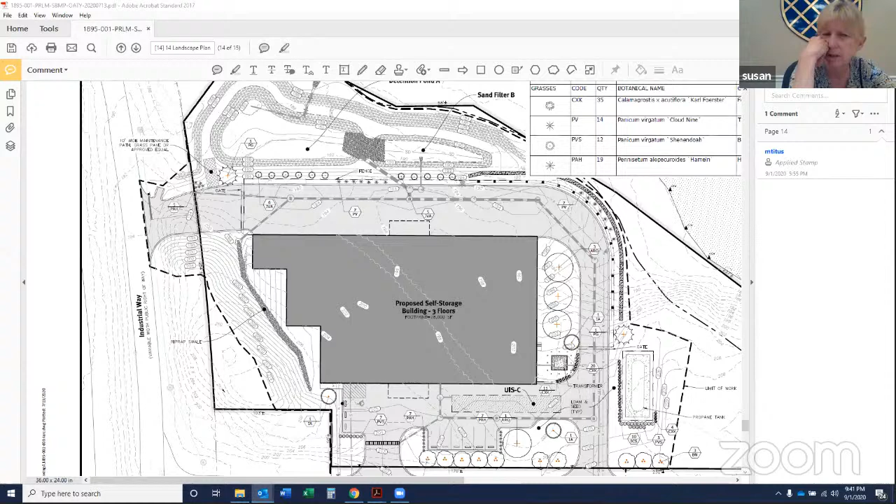Yeah, well, the ground cover is going to continue to grow and be ground cover. We're not going to kill it, but just clean it, to make it look attractive, and to allow some visual access. It's really the entrance to the whole park—it's an important corner, and you've set aside that land as something special, and the idea is just to start working in that direction to make it more attractive.

Rick, are you still there? Are you still with us?

Yes, I am. Okay. Yeah, all right, thanks for calling, Sue.

So we need to get your sense of what you think is acceptable as far as clearing. My question is still whether this should be brought to the council's attention, just out of courtesy, or if they should have a voice in this based on a recommendation from you, so there's no surprise.

I do not know, Sue, if it has to go before the town council or not, but what DPW would do is keep an eye when they're doing the curb cut. If they're going to do more clearing than what's shown on the plan, we would talk to Joe and also review it ourselves to see if the stormwater mitigation is still adequate. We don't expect a problem offhand, especially not with selective clearing. But if they apply to do more clearing, or are doing more clearing, we'd talk to Jennifer and Joe.

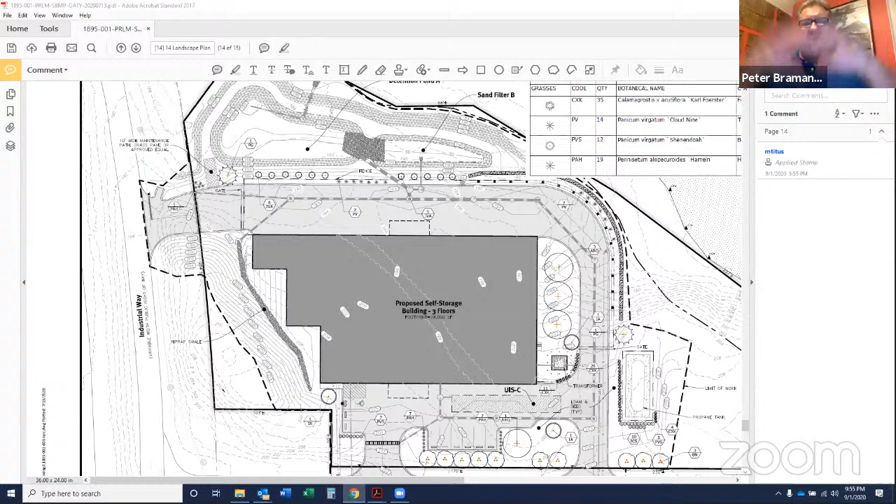I think earlier what Dave was referring to is kind of a cooperative understanding that outlines these criteria we were just saying, because this is also uncharted ground in a sense, as this industrial park is being developed and there are properties that bound the right of way, it's a more nebulous zone in terms of what we have jurisdiction over. But as Susan suggested, the view corridor is an important part. So I think that's a great step, a cooperative understanding with some criteria outlined so that everybody understands the implications, and we don't get down the road before something comes up as a surprise.

So whether that is coming to an understanding of a certain percentage, caliper size, what might be put in as well as what might be taken out to enhance all of those natural features, as well as provide the screening that we're looking for. I think that would be a really great way to approach this. And the spirit of that is really cooperative and mutually beneficial.

So just to be clear, the selective clearing and the screening is important, but also some visual access is useful because the owner paid a lot of money for the site. Right, a prominent site. We want to be reasonable. Visual access is important, some screening is important as well. We want to allow for something that's reasonable but not strict. Correct? Unless you totally landscaped it, but I think part of that access easement was for potentially infrastructure, the right of way.

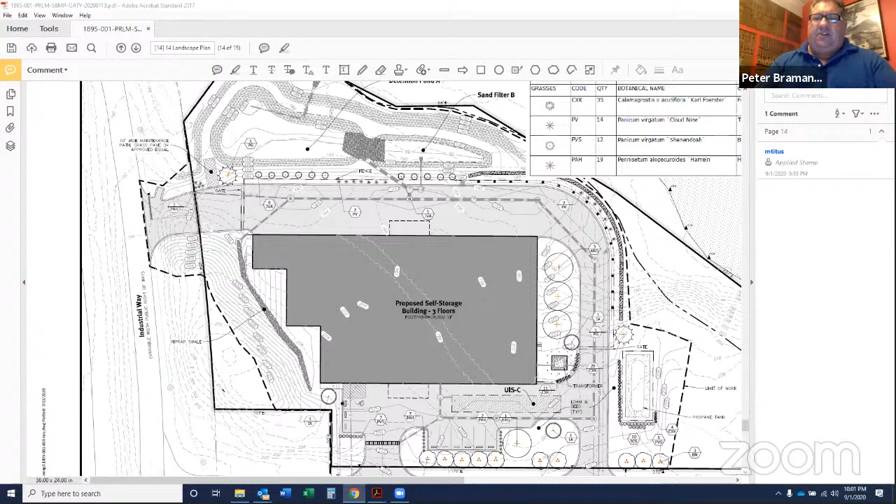And we had talked earlier on, and I don't know how possible it is, but if you have some way to illustrate that sight line we talked about, from the roadway back to the building, with the height and the mechanicals, I think if we accomplish all of that, it would give us a really clear indication, not only of the view corridor, but also what that roof line is going to look like too. That would be really great.

Right, maybe we could get a lot of this wrapped up. So does that sound okay for you guys? Yes, thank you, sounds doable. Oh my gosh, that's great. Super, thank you all so much. You guys really, really, all right.

Well, we need to continue the public hearing, or the informational public hearing, to the next meeting, which will be October 6th. So if you can get that stuff to us in the next couple weeks, that'll give us time to look at it and decide what to do with it and have it ready for the next meeting. Yeah, it should be plenty of time.

Do I need to make a motion? I forget, do I make a motion? Yeah, do I have a motion to continue this public hearing to October 6th? So moved. Who was that? Peter? Okay. And do I have a second? Is that Dave Perry? Okay, first and second, continue this to October 6th.

All those in favor? Okay, I have to do a voice vote, I always have to look at my cheat sheet so I don't forget anybody. Rosemary? Yes. Susan? Yes. Dave? Yes, okay thank you. Peter? Yes. And Christine? Yes, okay great.